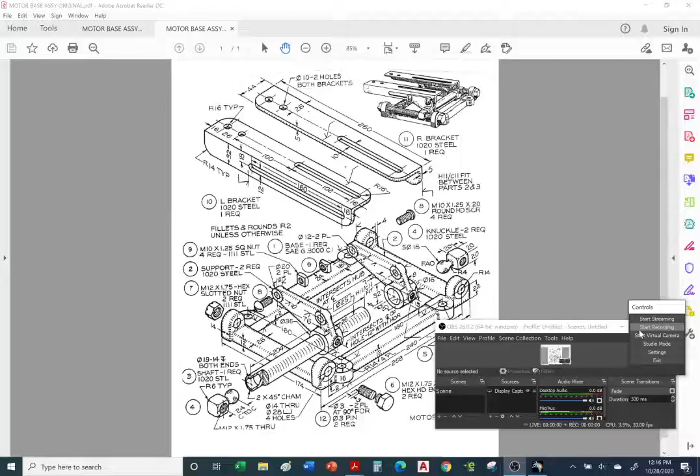Motor base assembly. For this assignment, you're going to model all the components for the motor base assembly. As far as the hardware, the bolts and nuts, you can either download them or model them yourself, but I'm also going to email you the loose hardware, bolts and nuts.

I want you to notice that this is in millimeters. So units are in millimeters. You can tell by the threads. Anytime you see an M in front of a number, it's indicating metric units. In this case, 10 millimeters for the major diameter on the threads. Here's another example: a bolt that has a major diameter for the threads of 12 millimeters.

Let's take a look at the base plate first. You're going to model the base plate first. This is probably the most complicated part you're going to model in this class, and this can be very confusing, so I decided to create a second handout. This is the original handout we've been using for years, so I decided to create a more simplified version and break it up into different pages.

We're going to model the entire assembly. This is the top assembly, and it's made up of smaller assemblies: this smaller assembly, this one, and this one. Let's go to the next page so you can see the smaller assemblies inside of the top assembly.

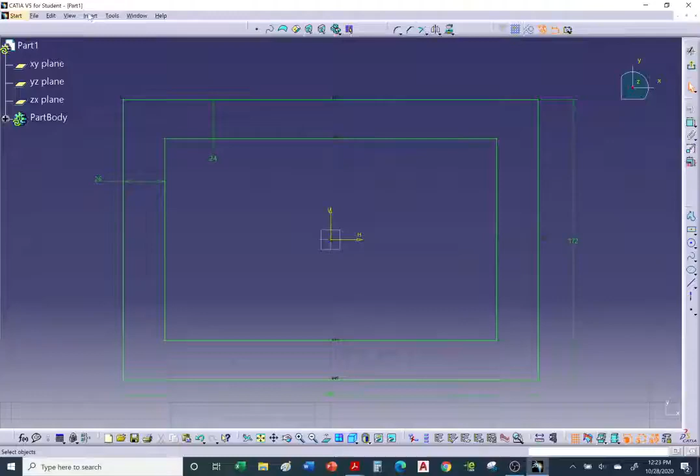And it's symmetrical. All right, so let's go ahead and exit, but before we do, let's do a tool sketch analysis. Everything looks good. Okay, let's exit.

Okay, so now we're going to do a pad. Going back to the drawing, the pad will be 12 millimeters. Now we're going to cut it in half, going 6 millimeters in each direction for a total of 12. So we're going to do a pad of 6 millimeters. Preview, there it is. But we're also going to mirror it so it goes 6 millimeters in the opposite direction of the sketch. There it is, preview, and that's a total of 12, okay.

All right, so now let's do a sketch for the tabs. Okay, so we have our tabs. We'll just have to draw one and then we'll do mirror to create the other three. Note the distance from the edge to the center of the arc or circle is 18 millimeters and the radius is 14. Okay, so we'll come back if we need to check the dimensions again.

All right, so we're going to do a sketch again, and I'm not going to do it on the surface. I'm going to do it on that same XY plane as the first sketch. I'm going to go ahead and, instead of using profile or arcs and lines and circles, use elongated hole to create that profile. So I'm going to go to elongated hole, one of my favorite commands.

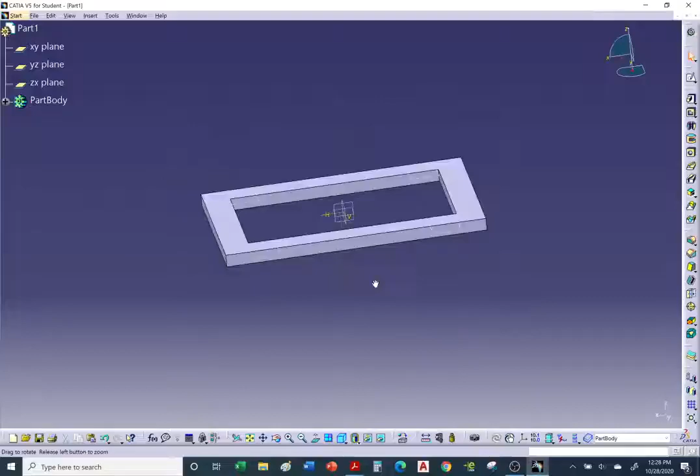Now, one thing about the tabs here, I want you to notice it's centered with respect to the neutral axis of the first pad. That's because we did our first two sketches on the same plane.

Now, if we go to the drawing, you can see that the tabs are thicker than the frame. The frame is 12 millimeters, the pad is 16 millimeters. If we go back to the original drawing, you can see that the tabs are 16 millimeters in thickness and the rectangular frame is 12 millimeters.

Okay, so we'll go with 16 for the second pad. We're going to select our second sketch, do a pad, and this time we'll go up to 8. Don't forget to mirror it, so it'll go also 8 in the opposite direction for a total of 16. And there we have it, as you can see.

Okay, now let's do the next set of pads. So now we're going to do this pad. Later we will address the issue of the 174 versus 172.

Okay, so let's focus on the sketch for this tab. We'll sketch one of them, and then we'll do mirror. So all we have to do is sketch one tab. Let's go ahead and sketch this one.

Notice from the edge here to the center is 22, radius of 14. I also want you to notice that this edge here doesn't line up with the edge of the rectangular frame. There is a 4 millimeter offset, so from the edge to the edge of the tabs is 4 millimeters.

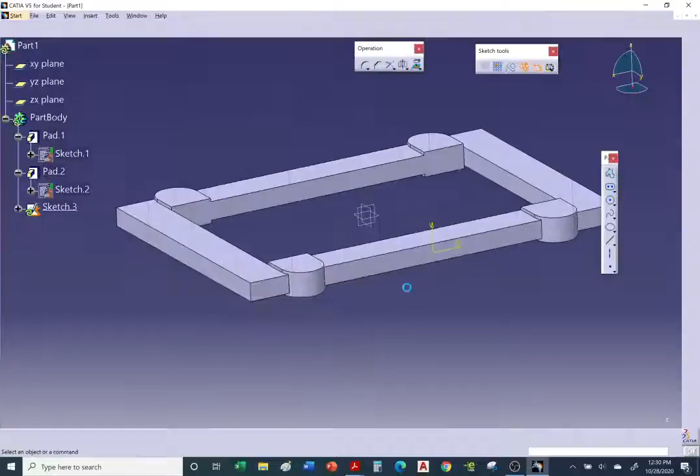Okay, so let's go ahead and just draw on the solid planar surface. Let's zoom into this area. Once again, I'm going to use elongated hole like we did on the previous sketch. Just guesstimate the size for now. We're going to use a radius of 14.

Enter. And like on the previous sketch, we're going to draw a line from tangent to tangent point. We're going to now select the arc and turn it into a construction element. There it is, as you can see. Then click in space to deselect and turn standard back on, or else any new elements you create will come out as construction lines or dashed lines.

All right, so let's go ahead and hit normal, make sure everything is parallel. Now I'm going to pick this edge, hold on to the control key, this line, and add a coincidence constraint.

And once again, the distance from the bottom of the surface to the center of the arc is 22. And we have a 4 millimeter offset from this edge of the rectangular base to the edge of the tab is 4 millimeters.

Okay, now we're almost there. Now here we have an issue. Notice there's a gap here. We need to fix this. There shouldn't be a gap here. If we go back to our original drawing, it's hard to see here, but if we look at it on the opposite side, there's no gap here. It's a nice transition from this tab to this one.

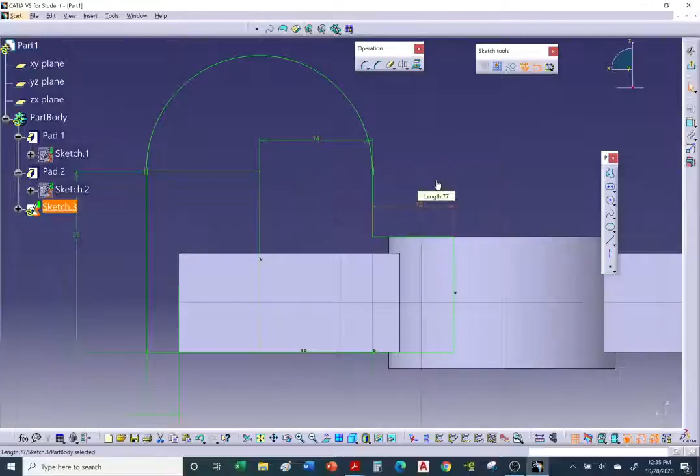So I'm going to put a dimension here, and we'll just round it off to a nice number. I'll just round it off to 12. It should work. There it is. And there's our profile.

Let's do a tool sketch analysis. Notice it's closed. Okay, everything looks good. All right, so let's go ahead and exit.

Again, once again, we extended this so it can blend into this pad, so we can have a nice transition with no gap. Okay, exit. Oh, one thing I did forget to do is I forgot to mirror it over.

Let's go back to the sketch, double click on the sketch. I forgot to mirror it over to the right side. Let's select everything, do a mirror about the vertical. There it is, tool sketch analysis. Good, everything's closed. Yep.

Exit, and we'll do our pad. Okay, we'll do our pad and then we'll mirror the pad over to the other side. Okay, so let's take a look at the drawing, see how much the pad is on this one. Here it is, 14. Okay, so 14 millimeter pad for this tab.

So let's do a pad of this sketch of 14 millimeters. 14 and preview. Notice it's going in the wrong direction, so I got to hit reverse button. Preview, there it is.

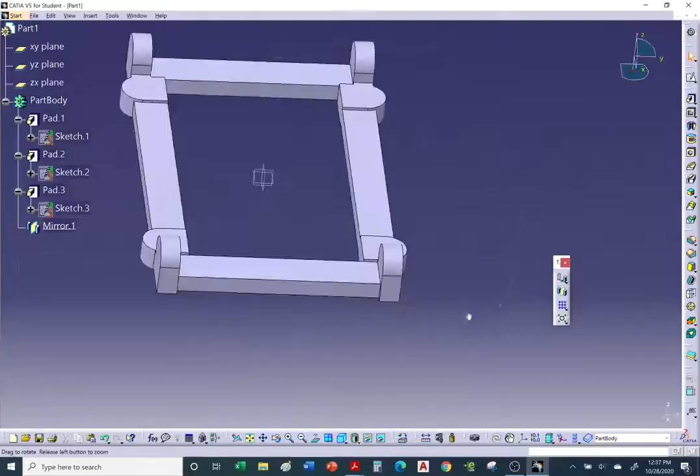All right, so everything looks good. Now let's address the 174 dimension. So going back, remember we talked about the 174 versus the 172. So it's 172 from here to here, but 174 from this edge to this one.

Okay, so let's check those dimensions. Now, if you want to leave it alone, I'm not going to take any points off. If you want to leave it the way it is, it's okay, I'm not going to take points off. I know this is a very complex part, so I'm being lenient on this one when it comes to grading. But if you want to fix it, let's take some measurements just to double check.

Use your measuring tools. So this is 172 as it should be, but from here to here should be 174, and it's not. So if you wanted to do it correctly and fix this, what we're going to do is take this pad and extend it 1 millimeter outward. And because of the mirror command, it'll also extend it on this side, and it'll make up for the loss of the 2 millimeters. So it'll increase it by 1 and 1 for a total of 174.

Okay, so let's go back to this pad, the last pad we created, and we're going to extend it 1 millimeter outward. Okay, so we're going to click on the More tab. There's a second limit, so now it's going to go in the opposite direction, and I'm going to increase it to 1 from 0 to 1. As you can see, it's giving us a preview. It's thickening outward.

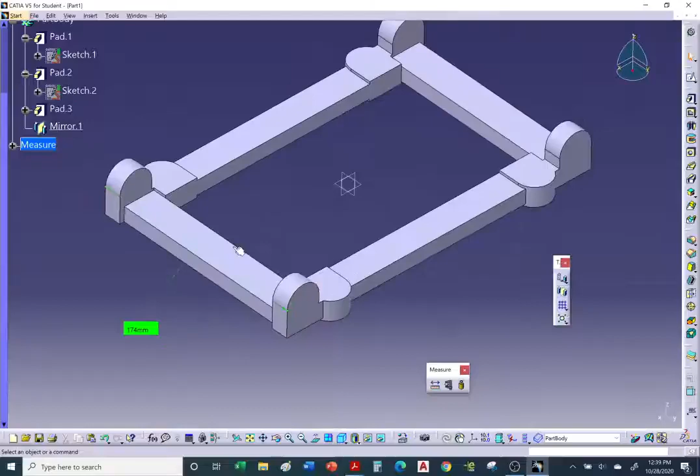Okay, let me remove this. I don't need it, delete it. All right, so we still have the holes and we have fillets, and we'll be done with this.

Let's look at the original. Notice how there's fillets. So this is either an aluminum or a steel. Oh, it looks like it's steel. So this appears to be a steel base plate.

So the base plate was casted in a mold. It was liquid metal poured into a mold, and once it's dried and cooled down, it'll be taken out of the mold and then it'll be machined. Now these surfaces are rough surfaces, just like on this one also. These are rough surfaces, and the rough surface is due to the mold. The mold, after being used, will not give us a nice clean finish after multiple uses.

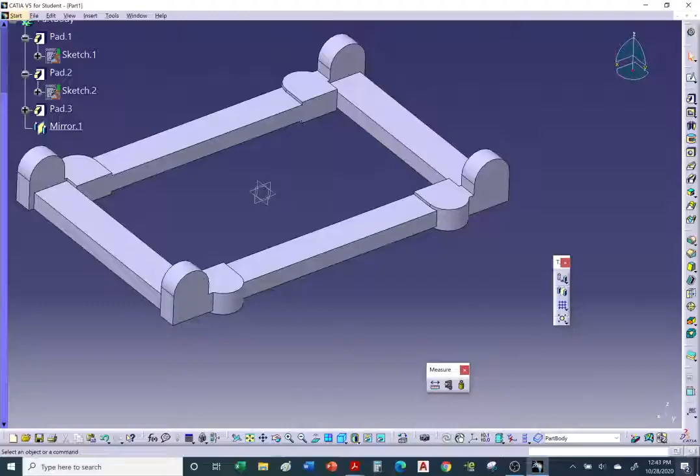Okay, so all rounds are 2, so this will be optional. Let's go ahead and do some fillets, and once again, if you want to leave them out, you may. I'm going to do the fillets for practice, or for those that want to see how to create them.

I'm going to create fillets, and I'm going to use the fillet command a few times, so I don't have to do fillets all in one shot. If you try and do too many fillets in one shot, there might be error messages, and it's going to be hard to find where the error is at. So I'm going to do a few fillets at a time, starting with the fillets around this tab first.

So I'm going to use the fillet command and a radius of 2. Notice that the default is tangency, let me explain what that means. If I was to pick this edge, it'll turn red, and notice this here turns like a red dashed line, letting me know that even though you chose this edge, it continues with tangency and ends here, it'll terminate here. So even though I only selected this edge, it recognizes tangency and keeps going till there is no more tangency.

When it reaches the sharp corner, the tangency ends. Or I should say tangency continuity, something you'll learn in CAD 37, surfacing in CATIA.

Okay, so now I'm going to keep going around, select this edge, select this edge. Notice it keeps going. See the dashes? It recognizes that even though I selected this edge, it continues on because it recognizes tangency, and then it stops once tangency ends.

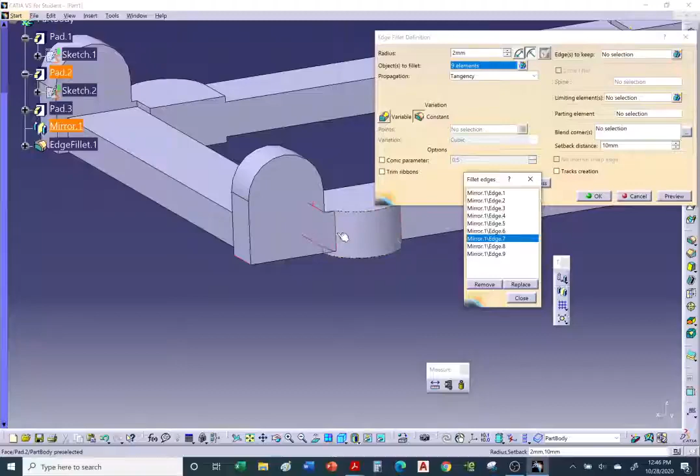If I was to hit this little bag here, think of this as a little bag of edges that I've chosen. So it's telling me these are all the edges I've chosen. You can remove them, you can replace them. You can just deselect if you want. If you want to remove a fillet, you can always click to deselect, or you can remove it from here. I'm going to close this sub window here.

All right, so you're going to see this increase in numbers as I pick more edges. Okay, so let's go to the other side, and I'm going to pick the same edges as the first one.

If you select an edge by mistake, let's say I chose a surface by mistake, lights all this up, you can always click on it to deselect to remove it. Okay. You have this one.

This one, and it kept going, good. And let's do this one, and the inside, okay. Let's hit OK to see what we get. No error messages, good. I'll just reselect again.

And again, the reason I'm doing a few at a time is because sometimes you'll get an error. And when you select so many, pre-selected so many edges, that it's difficult to go back and find the error. Okay, so let's select these edges here, all right.

Again, this is optional. Okay, let's go around the tab here. And it continues on, okay. I'm just going to go a little bit faster. Okay, and hit OK, make sure everything looks good, yes.

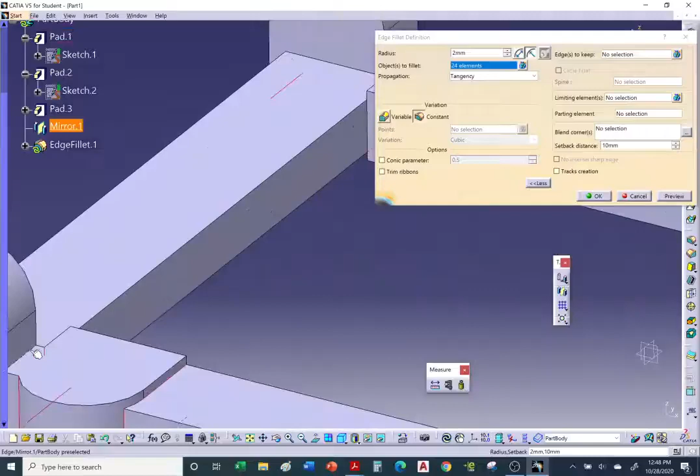Okay, let's go to the final corner here. May have forgotten, yep, I did forget the one on the other side. Select this edge. Okay.

And again, just to emphasize, typically you wait to the very end to do fillets. We still have to do holes. Oh, notice how I mistakenly clicked this surface. Let me click it to deselect. There it is, and OK.

All right, so that's one fillet operation. All right, so now I'm going to do a second edge fillet operation, and I'll do the rectangular area. Okay, so now I'm going to fillet the rectangular area.

Okay, I think I got all the rectangular area. And hit OK. There it is. Oh, I did miss the inside area.

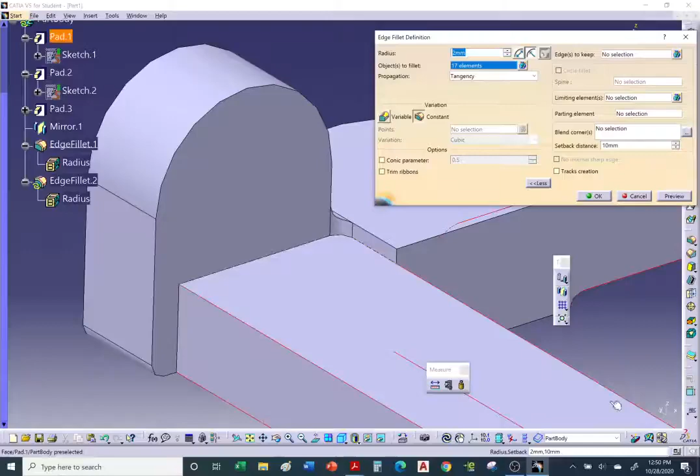So what I'm going to do is go to edge fillet number 2. Let's see what happens when we pick this edge. Hit OK. All right. So it was edge fillet number 2 that I forgot.

I also forgot to pick this inside edge. Hit OK. Okay, that's better. And I need to click this one. So let's go back to edge fillet number 2. Okay, that looks cleaner. All right, looks a lot better.

Now, one thing you can always do is go back in time. If I want to see what it looks like without the fillet, I can right click, define. It'll place these as dormant, I guess you could say. It'll ignore these and only show you the history up to this point. So right click define is like going back to the past. If you want to come back to the present, just right click on the part body and define, and it'll bring you back to the present.

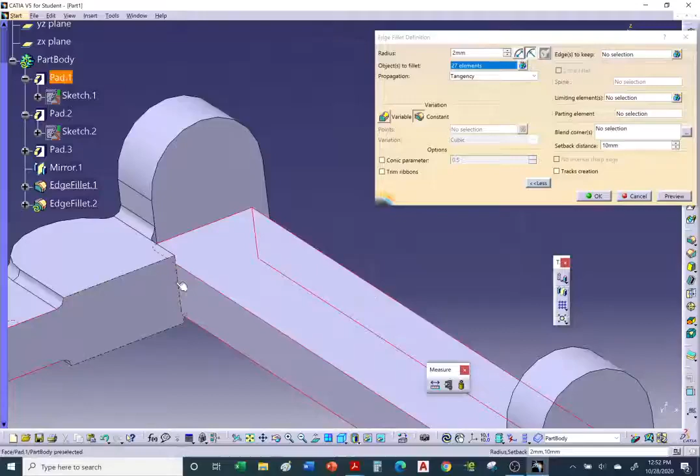Okay, I'm gonna have to do this also for the others. So let's go here, edge fillet instance number 2. I gotta go back and do these here, which I missed. So now I gotta go to all 4 corners. Okay, there it is, I think I got them all. Let me double check, make sure I didn't miss anything.

Now there may be a concern as to whether this can be manufactured, as far as the mold to make this part where you pour the liquid metal in. That's a whole different topic, not covered in this class.

All right, so now let's go ahead and put fillets around the vertical tabs. Let's create a new fillet instance, edge fillet instance number 3. Let's do one tab and see what we get. I'm going to select the top of this one and top of this one. Hit OK and see what we get.

Now it's just giving me a warning like, hey, double check that this is what you want. This is a very common warning when you create fillets. It's basically telling us, hey, check if this is what you want.

One thing I did not want is to fillet along this edge. If you go back to the original handout, notice there's no fillet on this edge. The reason is because this is machined. So maybe it did have a fillet at first and had excess material beyond 16 millimeters in thickness, and then the machine shop came in and smoothed this out, most likely because a bolt goes here to bolt this onto some type of work table. So again, we don't want this edge with the fillet.

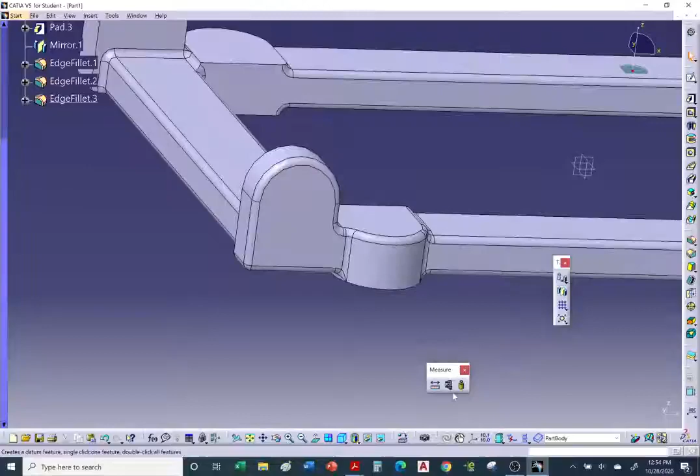Okay, so we need to fix that. I'm going to double click here. Notice we mentioned tangency before, let's see what happens when I go to minimal. I don't want it to continue its path along a tangency. Because tangency was the default, it kept filleting and kept going around, because it recognized there was curvature or tangent continuity. So I'm going to take this off, go to minimal. Notice it already removed it. I'm going to hit OK, see what we get, and it stopped. Okay, good, so it stopped.

Now we may not need to fillet this area. If we look at the PDF file, it kind of fillets this area. We'll just leave it the way it is. Maybe there's no fillet here, but we'll just leave it to save time.

Okay, so let's do it on the other 3 tabs. Let's double check here, make sure everything else is okay. Let's double click on edge fillet 3, or the last one that you created, and do the same thing for the other 3 tabs.

And if you were to show this to an NC programmer or a machinist, they'll probably say, hey, we don't like your fillets, you need to go ahead and fix it because it's difficult to machine those fillets. That just comes with experience, and also you can get advice from a more experienced tool designer or machinist. Okay, there it is.

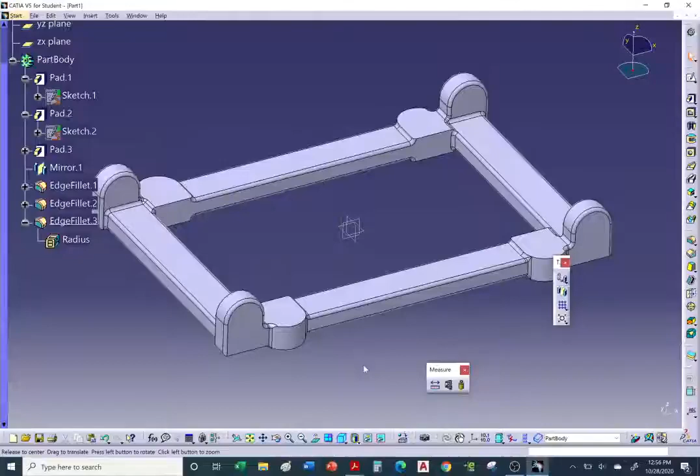One thing I'm going to do is pre-select the edge, the arc, so it'll center the hole. So click on the hole command, click on surface, and we have a 12 millimeter diameter, and we're going to go up to last. That'll go all the way through, and okay, there it is. Let me double click on these toolbars so they can be docked back where they belong.

Okay, now let's mirror, so we can mirror this hole over to this side. Or you can do one hole at a time, it's up to you. I'm going to use mirror, and we're going to mirror about the vertical. There it is, it's giving us a preview, and okay. So there we have the two holes.

All right, so let's mirror these two holes over to the other side, this one and this one.

Let's use mirror again. Now it's giving us an error message, telling us you cannot mirror a transformed element, in other words you cannot mirror a mirrored element. So I'm just going to cancel that. Since this hole was mirrored, you cannot mirror a mirrored or translated element.

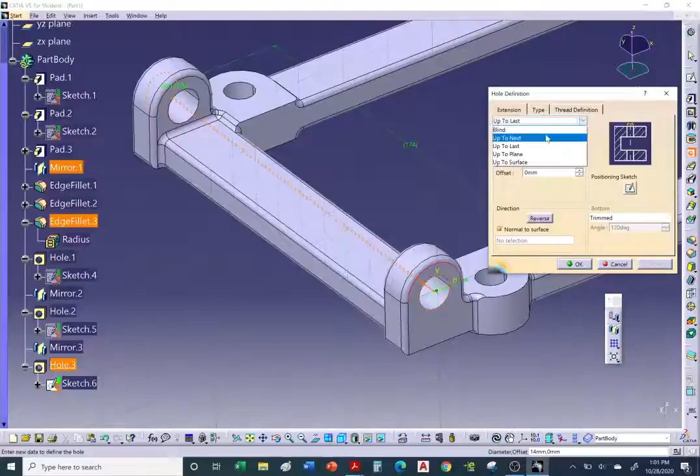So I'm just going to have it go through the first tab and hit preview. There it is—so it makes the other one disappear.

All right, now we're going to go to counterbore. Go to style, and select counterbore, to create a larger diameter hole over the little one. There it is. The diameter, if we go back to our drawing, is 28—this is the counterbore symbol. In this case we're just doing a spot face, barely kissing off the surface to remove the rough area to accommodate the head of this bolt.

Diameter of 28, and preview. Notice it's cutting through, but we don't want to go that deep—we're just going to kiss it. So we put a depth of 1 millimeter, and okay. Notice it just removed part of the rough area. If you want to go 0.5 millimeter, go for it. We're just kissing off the rough surface due to the casting.

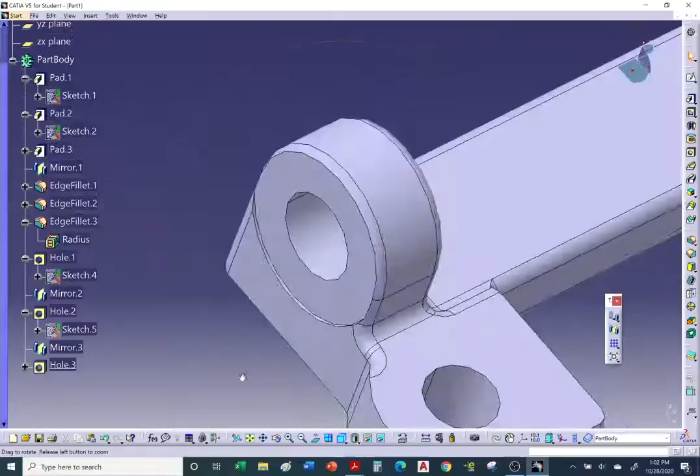Now I'm going to go down to 0.5 millimeter. I'll go back to the hole command, go to the type tab, depth, and set it to 0.5. Preview—yeah, that looks a lot better. Okay. A lot cleaner. This is referred to as a spot face or a counterbore hole.

Okay, so I'm going to repeat the same thing.

Okay, so I'm going to do the exact same thing on this side, and it should use the default measurements I used earlier, the default diameter and depth. So I'm going to pre-select the arc, click the hole command, click on surface, and there it is. It remembers the last inputs, and there it is.

Okay, now what I can do is mirror these two. I'm going to pre-select the two holes, and mirror them over to the opposite side. Let's use mirror, and we're going to mirror about the vertical, the ZX plane. It's already given us a preview, and okay. There we go, we have our spot face and holes.

All right, and once again, don't worry about the fillets. If your fillets look different than what I modeled up, it's okay. We can spend a whole semester just talking about fillets. And again, fillets, it takes experience to know how to fillet edges, especially when there's curvature involved. And it also, you need to have some machine shop experience or NC programming experience. An NC programmer for a machine shop will tell you if it can be done or not, or they'll advise you on how to fix that.

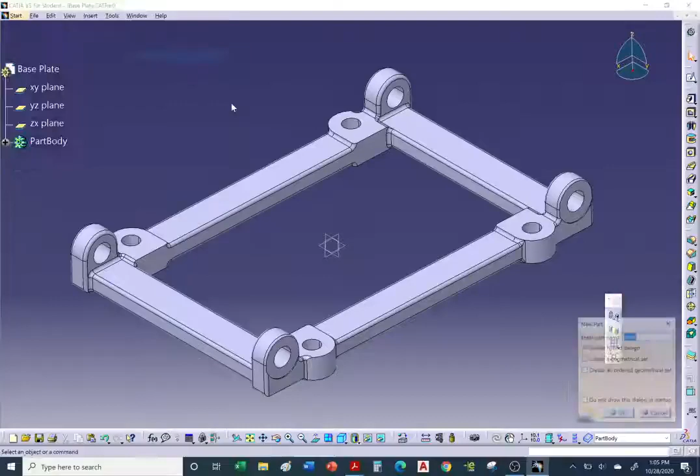Okay, if you want, go ahead and save your base plate. I'm going to create a new file, or you can just go to Start, Mechanical Design, Part Design. Even though we are already in the Part Design workbench, if we click on it again, CATIA assumes you're going to start a new part. So if I go to Part Design Workbench, even though we're already in it, as you can see, CATIA knows to create a new part.

Now I did not lose my base plate. I can always go back to it, just go to the drop down window, to window drop down, and you can go back to base plate. So I currently have 2 sessions open. If I go vertical, you can see both sessions. Notice this is blue, letting me know this window's active. If I click on this one, it'll turn blue, and now this one's active. You can either maximize here or double click on the frame to maximize that window.

Okay, so we're going to draw an L shape. Let's sketch, I'll sketch on a vertical, I'll pick the ZX plane. It doesn't matter which one. Create a sketch, and I'm going to draw an L shape. Now you can continue on and close the profile, but I'm just going to do 2 lines, and I'm going to escape and exit.

Okay, and I'm going to add my measurements. So let's go back, measurements are 44 and 32. 44 for the horizontal, 32 for the vertical.

Okay, so the rule to follow is to do a closed profile, right? We want to close it. But we're going to cheat. We can get away with not using a closed profile and still use pad. So let's exit the sketch, that's all we needed, tool sketch analysis. It's going to warn us, hey, this is open, it's not closed. I want you to notice that in cyan, it shows us where the mistake is at. It's telling us, hey, there's a gap or there's an overlap. Okay, I'm going to ignore it. I'm going to exit the sketch.

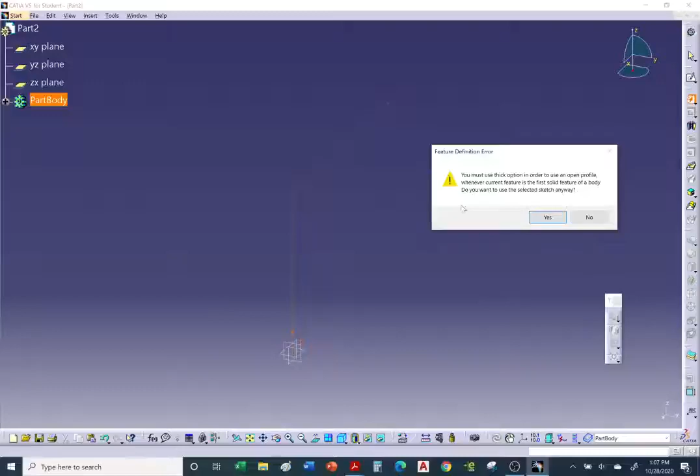Now I'm going to do a pad. And when I do a pad, it's going to give me an error message, say, hey, this is not a closed profile. But you know what, if you pick the thick option to thicken it, then we'll accept it. And say yes, we are going to thicken it.

All right, so let's first get the length of this bracket. So the overall length is 260 and it has a thickness of 5. So 260 for the length. For the length, we're going to go 260. And preview, and it's still warning us, hey, this is not a closed profile, you need to use thicken. Okay, so I'll hit OK.

So here's the thick option, so click on the thick option. And for thickness, we're going to go 5. So you can thicken in two directions, inward or outward. Let's thicken this to 5, it's going inward, that's what we wanted. You can always thicken in two directions, we're going to go inward as far as the thickening. We can also go outward, as you can see, but we're not going outward. I'm going to go back to 0. Preview, and there it is. And OK.

Okay, we got the difficult part done.

All right, so let's go ahead and add some sketches. Let's sketch this one on the top surface.

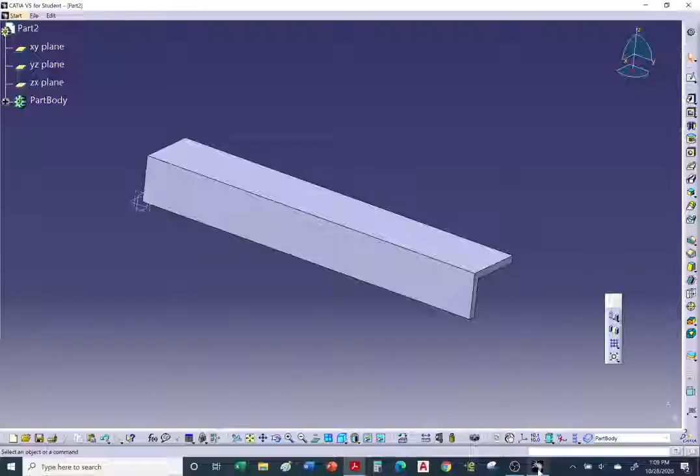Typically when you do these 4 corners with fillets, you want to keep it the same, but in this case they're not. So one pair is 16. Fillet this corner, and this corner was 16. Type in 16 for your radius - there it is. And for the bottom, we're going to go with 4... my mistake, 14. Okay, 14, not 16. And there it is.

Okay, so now let's go ahead and do our sketch up here. Now typically we want to do it on a plane, but we don't have a choice here, so we'll use the surface.

So we do have a slot and we have 2 holes. Now they do line up with the fillets here. So let's start with the elongated hole - one of my favorite commands, right? So we'll do an elongated hole and then we'll put a constraint with the arc.

I'll worry about the dimensions later.

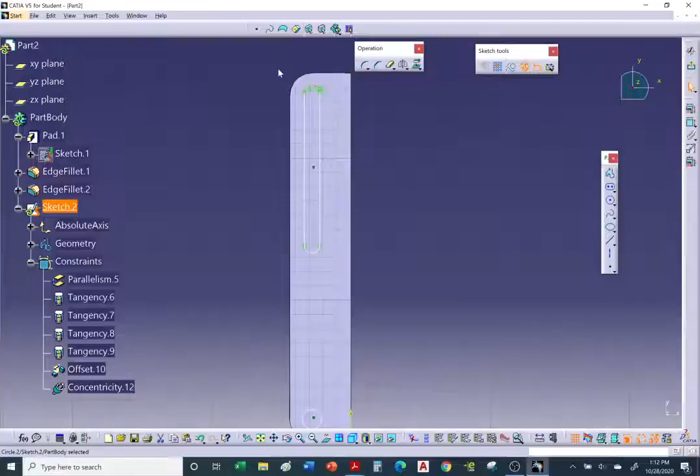Okay, so I'm going to add a relationship between this circle and the arc. Hold on to the control key, click on the arc, and we're going to make it concentric. There it is - now the hole is centered with the arc. We're going to do the same thing with the slot: pick this arc, hold on to the control key, click the arc, concentricity, and OK.

All right, and we have another hole. Now we do want to line it up with this one, so I want to track it. I want you to notice that this hole, if I grab it by the center, it's constrained to this one - at least it appears to be, or else it's constrained to this line. Oh, I didn't constrain it. It tracked this point, but it actually constrained it to this center line, which is fine, because I think these two holes are centered about this line of the elongated hole.

All right, so let's go get some measurements. Let me go ahead and turn this just so I can match the drawing. All right, so, elongated hole - it has a radius.

So what is the radius? Well, it's just half of 10, which is 5. Okay, so they're giving us this distance instead of the radius. They do have a relationship because these horizontal lines are tangent to the ends of the arcs, and the arcs are 180. And the radii, or diameter I should say, of the holes are 10 - so it just happens that the arcs are the same size as the holes.

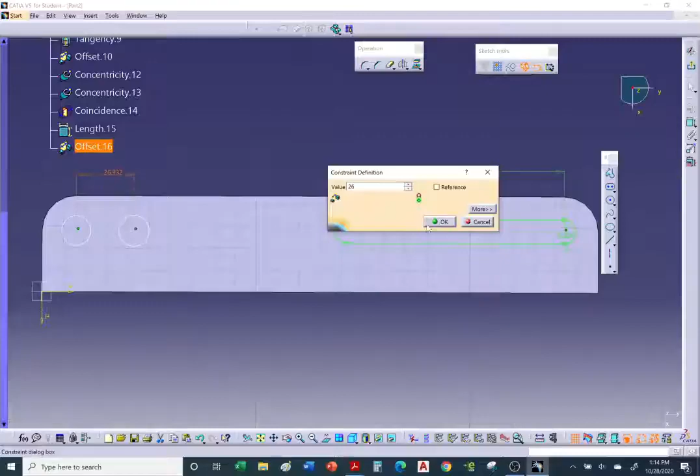And we have diameters of 10. Okay, so diameter of 10, and diameter of 10 for the other one also. And OK. All right, so let's take a look at the radius here, which is 5, half of 10. So let's change this to 5.

And there it is. Let's do a tool sketch analysis - everything is closed, good. And we'll do our pocket. Okay, let me just double check the dimensions - yep, 102, 26, and 10.

All right, so let's exit and do a pocket, up to last, and OK. And there it is. Okay, so now we need to do our sketch for this wall here - okay, so we have a slot.

Okay, so this slot isn't lined up with the arc. It should have been - it's probably a mistake on my end, but it's okay. We'll just follow the dimensions here. If your dimensions are off, I'm not going to take any points off.

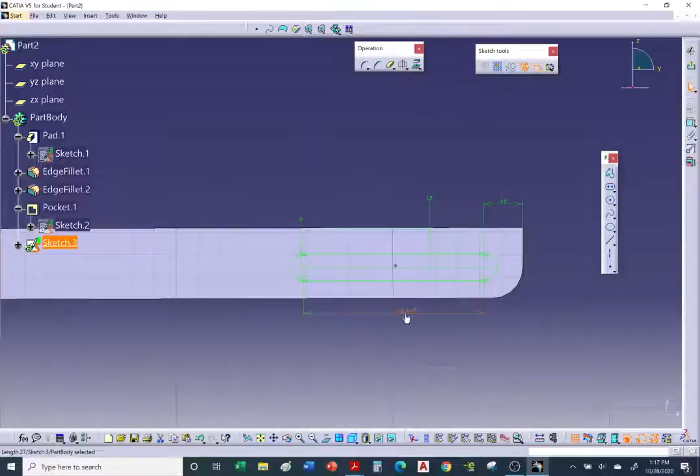Okay, it looks good. Let's do a tool sketch analysis - everything's closed, everything's good. And let's exit and do a pocket. Up to last, and okay. And there it is, we're done with our bracket.

Okay, I don't think we missed anything, got all the features. Oh, I'm missing the radius of 2. So we have a fillet here of 2.

And actually along the inside edges - so all the inside edges have a fillet of 2. Okay, so let's do a fillet here first of 2. Okay, so 2 radii or radius, and okay.

All right, so let's double click and let's add more. Let's see if it'll let me add this edge. Let me hit OK, see if it'll accept it.

Okay, notice how it does a turn here. So I'm going to do it in steps. I'm going to remove the second edge that I chose.

I'm going to remove this one by selecting it and only keep the original one, the one edge that we selected. I want you to notice that we're going to get a different result when I do a second edge fillet. So I'm going to do a second edge fillet.

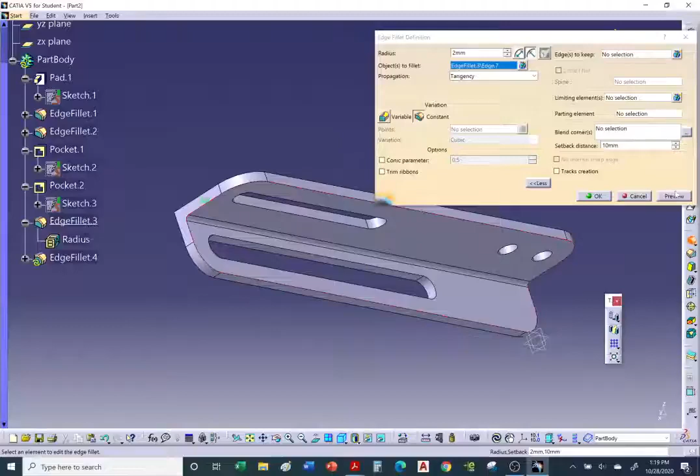And by clicking this edge, it's going to go all the way around. Notice it follows tangency because that's the default. Preview and hit OK. Notice how we get a different result by doing 2 separate edge fillet operations versus 1 - it'll give you a different result.

So if we go back, I can click define, go back here. And just to show you again what would happen if I select the second edge under the same edge fillet operation. Notice it'll give you a different looking fillet.

Okay, now the second fillet can't exist because it's going to clash with this one, so I'm just going to hit undo so we can go back to where we were. There it is. And to come back to the present, right click on the part body and define. There it is. Okay, so we're done with this part.

Let's go ahead and give it a name. Right click, properties. Okay, and we'll call it bracket.

And okay, you know what, let's give it some color. You don't have to do this part, but it's good practice. Right click, properties, go to graphic tab. I'm going to give it some color.

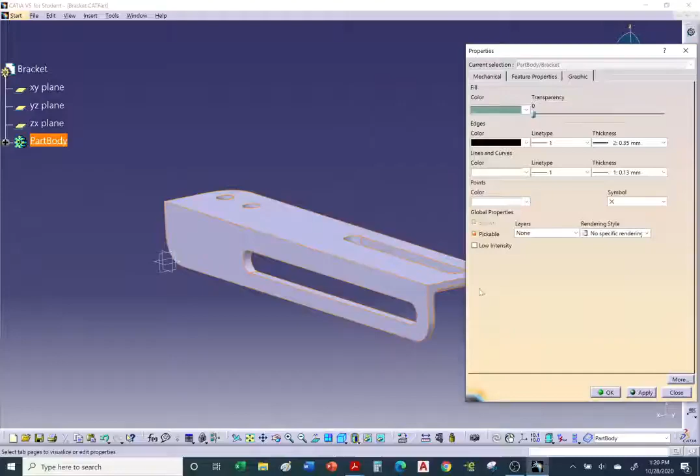Let's go to more colors. And I'm going to pick - it's good to pick soft colors. Soft colors for the large pieces and bright colors for the small pieces, like the hardware. Okay, so give it some color.

I'm going to go back to my base plate and give it color. Right click, properties, pick whatever color you want. If you want to make it yellow, keep in mind it's going to be bright, it's going to be an eyesore. I'm going to give it a purplish color - nice soft color. Okay.

All right, so now let's move on to the next part, which is the support. All right, so there's different ways of doing this. I'm going to use profile.

We can also draw circles and then connect the circles with lines for our sketch. Okay, so we're going to start by first drawing this wall or this flange, and then we'll come back and do the bosses. Let's do this sketch, and it has a pad or thickness of 8.

All right, so I'm going to do a rough sketch first, and I'm going to have the origin here at 0, 0. All right, so let's start with this simple sketch.

Okay, so let's start again, mechanical design, part design, and even though we are in part design, when we click it again, CATIA knows that you want a new part.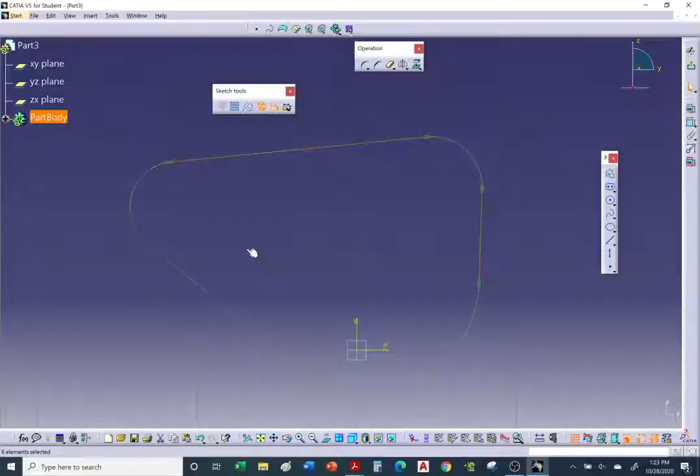Okay, you can see this is a very rough sketch. All right, so first, look, I'm missing a tangency, as you can see. I was to grab to this corner. You can clearly see it there. All right, so I'm going to start by making this arc centered about the origin. So here's that point, see there's that point for this arc. That's the center. But let's see if I can put concentricity between the origin and the arc.

So I'm going to hold on to the control key on the keyboard, select the origin, the arc, and go to constraints. Oh, it does allow me to add concentricity. I wasn't sure if it would. There it is. Okay, so I pre-selected the origin and the arc and went to concentricity constraint.

Okay, this should be vertical, so I'll make this one vertical. And this one should be horizontal, let's add a horizontal constraint. And we need to add a tangency constraint between this line and the arc. Hold on to the control key when you select the two elements, and let's add tangency. And check that we have tangency all the way around, and yes we do.

Okay, so now let's throw in some dimensions. All right, so this has a diameter of 36, so the radius is 18, half of 36 is 18. And these circles here have diameters of 20, cut that in half, and that's a radius of 10. Okay, so 18 and 10.

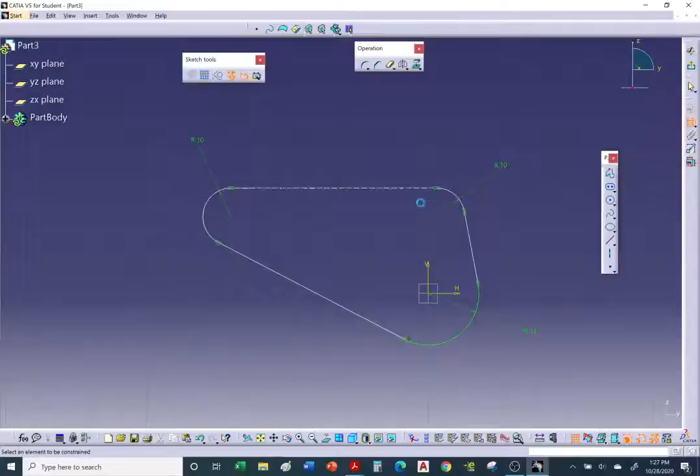Okay, so now let's put a dimension from center to center. It was 72, I believe. And then we have a dimension from the horizontal, which happens to cross the center point of the arc, to this center. And I forgot the dimension, 32. Oh, so it's 76 and 32.

And 76. All right. Now we have this dimension of 4. So from this vertical here to this point is 4. Okay, so let's go ahead and add that one.

Okay, so you have two options. You can either go to the vertical, which happens to cross the center of the arc to this point, and change it to 4. Another option is, let me delete it. Let's go center to center, but notice it's not giving me a horizontal dimension. You can force it horizontally, just right click and say, hey, I want a horizontal dimension. There it is.

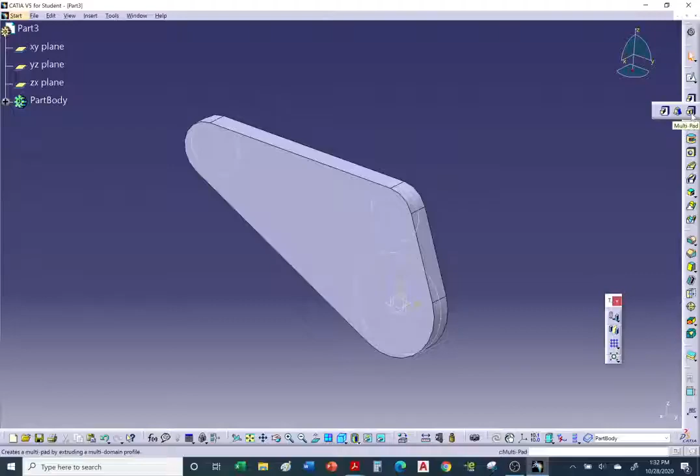Okay, so instead of doing a pad, we're going to do a multi-pad. Okay, so let's go to multi-pad here. So click on multi-pad and let's select the sketch. All right, so we're going to do a pad of 12 and preview.

My mistake, I got to do it here. Click here. We're going to give it a thickness of 12. Oh, I picked the wrong one. That one has a thickness of 26, or I should say 13, because we're going to mirror it. Let's see if we have a mirror option here. There it is. So we can also go 13 in the opposite direction. Did not have a mirror, so I'll just manually type in 13.

Preview. There it is. Total of 26. Now let's go to the next one. So the next one, we're going to go 6 in each direction. And preview. There it is. Total of 12. And finally, the last one. Same thing. We're going to go 6 in one direction and 6 in the opposite for a total of 12. Preview. And there we have it. There's our bosses. And OK.

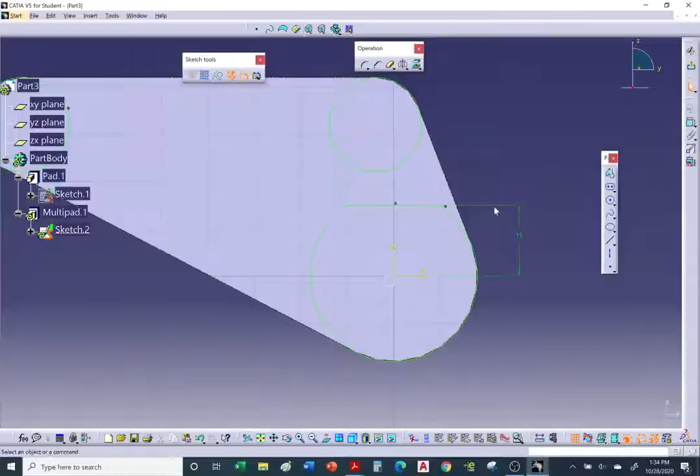Okay, so we're just going to simply use the eraser, quick trim, to remove the top portion. And there it is. So we have our flat top. Do a tool sketch analysis again.

Everything is closed. Okay, close it, exit, and your pad should update. There it is, it turned red, letting us know it was updating, and it did. All right, tough part is done.

Okay, now fillets. Fillets are a nightmare. So I'll leave that up to you if you want to fillet this object. We have fillets of 2, so typical radius of 2. Okay, so all the rounds are 2.

But before we do, I forgot to add this little boss. Luckily, we have this hole centered about the origin, so that'll help us create the surface here, or this pad. We're going to do a pad with the vertical plane here, and sketch it looking this way, horizontally on the vertical plane. We're going to draw a diameter of 16. Okay, so let's go back.

So on this vertical plane, in this case the ZX plane, I'm going to draw a sketch. I'm going to make a circle of 16, and again we're using that same origin. Diameter of 16. Notice the sketch is in this vertical plane. Now the pad is out here, but that's okay, we'll come back and fix that. And exit.

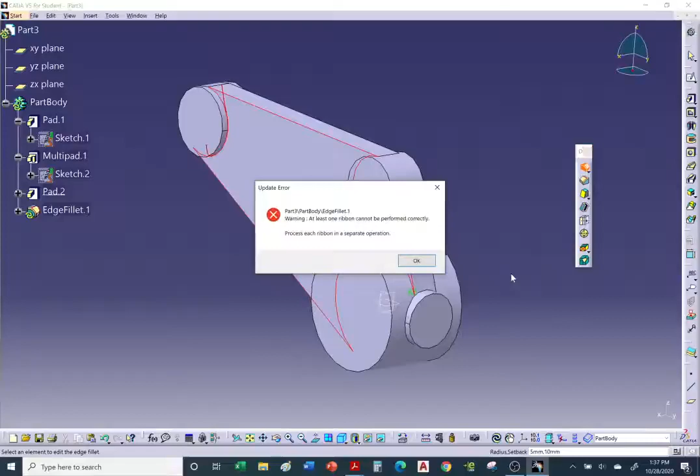Hey, do you want us to compute it? Yes, sure. Nope. Okay, so do you want to keep explicit edges? Let me say yes. I think what's causing the problem are these two edges. Let's see what happens when I say, hey, keep these two edges. Let's see what happens. Notice it's a light purple or magenta color.

So where it says keep edges, it's not going to try and fillet this portion. Let's see if it'll allow it to. Preview, and it looks like it did accept it. Close. Oh, and obviously the fillets are way too large. That could have been another reason for the error message.

So the default was 5, I changed it to 2, and it did accept it. Okay, so edges to keep. So that worked.

Now let's do the same thing on the other side. I'll do it as a separate operation and fillet. Let's see if it accepts it. Hit OK, and this time it did work without having to pick the edges to keep.

So in the previous one, the fillets were initially too large, and I chose edges to keep. Let's see what happens if I go back and remove those edges from the first fillet. I'm going to deselect them, I'm going to remove them. Oh, my mistake, cancel, go back.

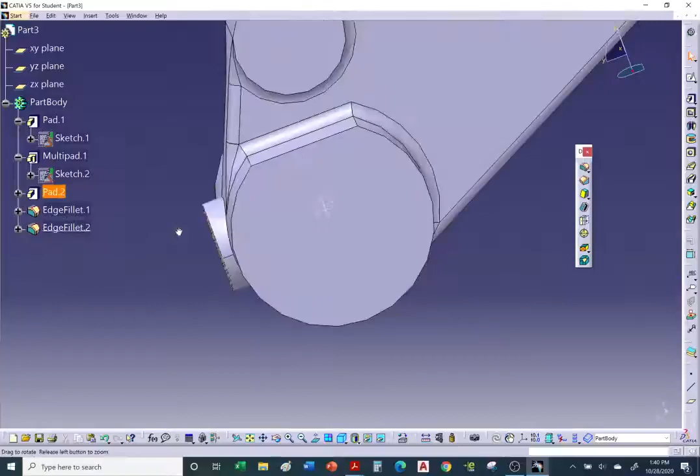So this is very common. Even though it's a mirror image, notice how the fillet on this side looks different from this side. It's the way it generated the fillets. Maybe it started on one edge for one and a different edge on the other one. Okay, we can go in circles trying to fix this. I'm just going to leave it alone, I'm just going to let it be.

All right, so now let's try and put a fillet around this one. See if it accepts it. Okay, did accept it. All right. I'm not going to try and go back and figure out why this didn't work. I can spend quite a few minutes or maybe an hour trying to figure it out. I'll just leave it alone. All right, so let's look for more fillets.

Okay, I think we got all the fillets. If I missed any, that's okay, let's just move on. Now let's draw or create the holes.

We have a 25 diameter, 12 diameter, and this one is a threaded hole. The M is for metric system, so we have an M10, meaning a 10 millimeter diameter threaded hole. This is a tapped hole with threads, but we never model threads because it eats up a lot of memory. So we'll just do it as a plain 10 millimeter diameter hole.

Okay, let's go place the holes into this part. Let's do the 10 millimeter one first. I'm going to pre-select the edge, and we're going to drill a hole through the surface of 10 millimeters.

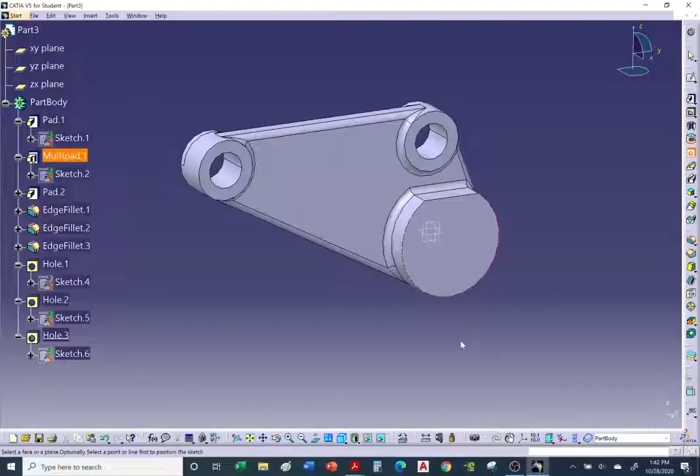And finally, the large hole, forgot the diameter, is 25. You can click the hole command and then click the edge, the arc. It'll center it - there it is - 25 diameter, up to last. Okay, there it is. Notice it took care of this hole, which is fine.

So this is a threaded hole where a set screw goes - it's just a screw with no head. The reason it doesn't have a head is so that we don't over tighten it. Okay, and these are just smooth, simple holes.

All right, so let's double check, make sure I didn't forget anything. Looks like we got it all.

All right, so let's name it support and give it a color. Right click properties, let's go ahead and give it a name: product, support, and okay. Oh, I forgot to give it color.

Right click properties, go to graphic. Oh, my mistake, I need to right click on the part body. Let me close - right click on the part body, properties, and that'll allow me to give it color. Go to the graphics tab. I'll make this tan or light brown. There it is. All right, so we're almost there.

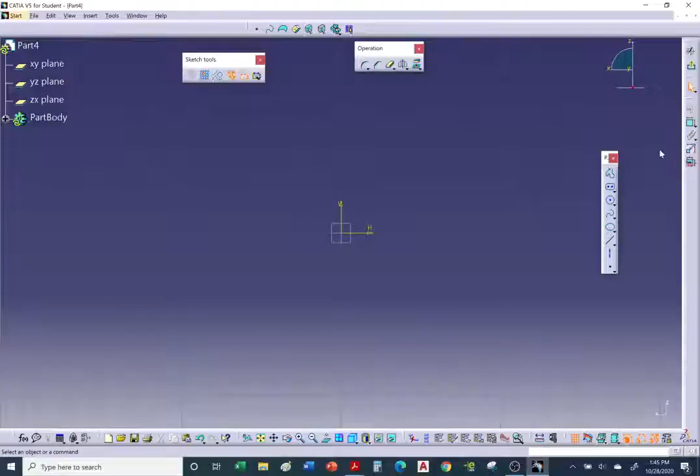All right, so let's go ahead and draw a sketch on any of the planes. I'll pick this vertical plane, the ZX plane, and let's do a sketch of a circle. I believe it was 25 in diameter.

And okay, we don't have to do a sketch analysis, let's go ahead and exit. Let's do a pad, and we're gonna do a mirror pad, okay? So we went with the diameter of 25. The length is 204 - cut that in half, so we go 102 in each direction, normal to the sketch.

Okay, so pad, sketch, 102, 102, preview. And let's use the mirrored option, and okay. All right, so now we need to add some holes.

Okay, so the holes: diameter of 19, depth 14. Diameter 19, depth 14.

Okay, so I'm going to pre-select the edge of the cylinder, go to hole command so that way it'll center it, click the surface. So we have a diameter of 19 and a depth of 14. And okay, there it is.

And repeat on the other side. You can hit the hole command and then select the edge - as long as it's an arc or circular, it'll center it, and it remembers the last input. And OK. And we have chamfers going around the edges.

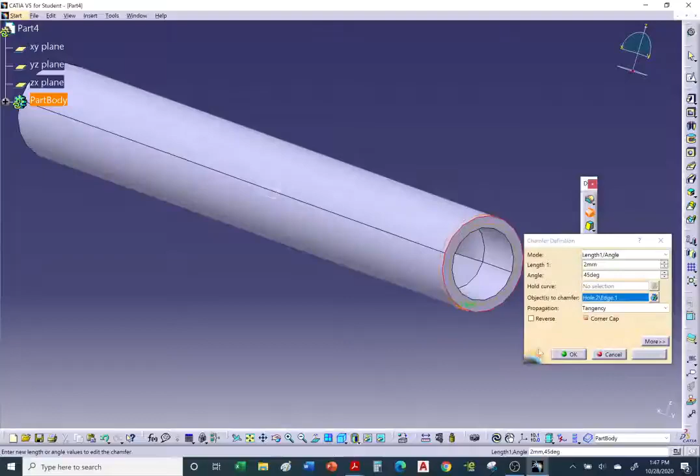2 millimeters by 45 degrees. I'm going to pre-select the edge and we're going to do a chamfer. So it's 2 millimeters, angle of 45, preview. And there's our chamfer.

We can always go back and create a second chamfer. We can just double click on the first one and select a second edge, so it'll do both edges under one chamfer command. So we don't have to do a second chamfer, we can do it all in one shot. And there it is.

Let's go ahead and give it a name. Right click properties, product, we'll call it shaft. And let's give it some color. Right click properties, go to graphic. Right click on part body, go to graphic, and again let's give it a smooth color. I'll use blue. And there it is.

All right, if you want, you can go ahead and save it. Let's go on to the next part, which is the knuckle.

So for the knuckle, to make it easy, we're going to sketch about the origin. We'll draw half the profile when we do the spherical portion. So first we'll start with the rectangular sketch, do a pad, and then we'll come back and do a profile of the spherical portion and do a revolve or a shaft command.

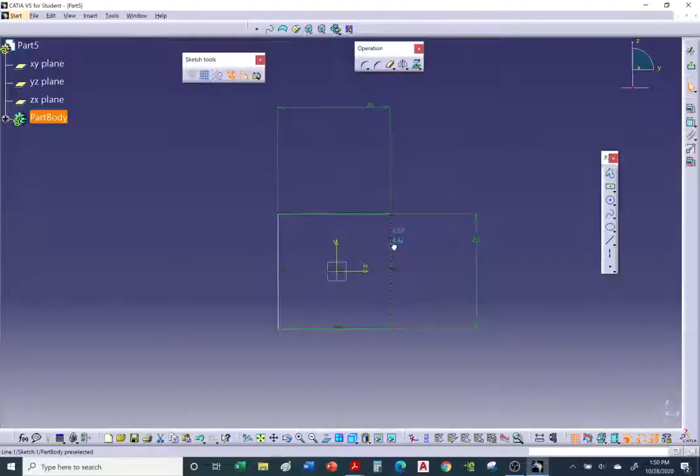Oh, and I missed something. Somehow this dimension... whoa, I didn't pick the origin. So I need to constrain it with the vertical. I misclicked, I didn't exactly pick the origin. So what I'm going to do is pick the center point here of the rectangle, hold on to the control key, and make it coincident to the vertical. It did end up being coincident to the horizontal, but not the vertical. I just slightly misclicked, so let me fix that. And there it is.

All right, so now let's go ahead and do a pad. Exit, do a sketch analysis first, pretty sure everything is fine. And let's do a pad of 10 in each direction, and do mirrored. And there's our cube, our 20 by 20 by 20 cube.

Next thing we're going to do is our spherical portion. I'm going to pick a vertical plane, the YZ plane, to do our sketch of the spherical portion. This is going to be a little bit tough.

I'll start with profile. I'm just going to do a rough sketch of the spherical part, starting with the vertical, which later I'm going to line up with this edge. Click, and then I'm going to do an arc. As you can see, I'm already creating the profile. Click, and then another arc tangent to that one. I'm trying to pick the horizontal, so I only need to draw half of the profile. I'm going to constrain it so it lands on the horizontal axis, and it'll constrain it. There it is, and hit escape. So there's a rough sketch of our profile, click and space to deselect.

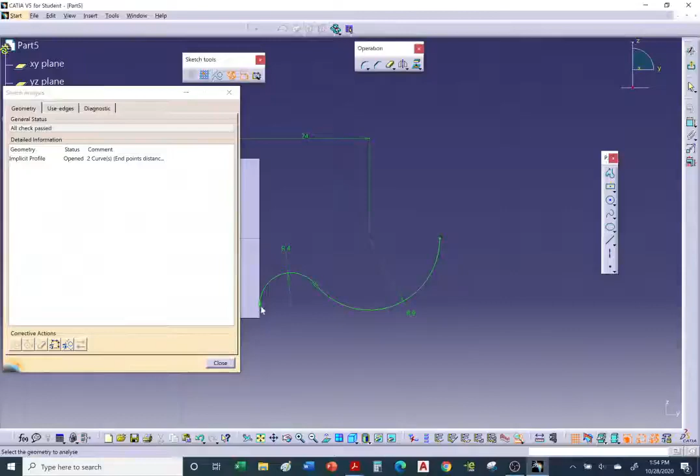We're going to do a tool sketch analysis. It's going to give us a warning: hey, this is an open profile. You can see the cyan circles letting us know it's open. Those are the endpoints. We're going to accept it. All right, so let's go ahead and exit.

Okay, so now I'm going to do a revolve. If it refuses to do the revolve or the shaft, I'm going to have to go in and close the profile. Let's try it without closing it, see if it'll work. Okay, so I'm going to select the sketch and do the shaft command, or revolve. Seems to accept it. Okay, we're going to rotate it about the horizontal axis of our sketch.

Okay, another option is to rotate it about an axis. So we can rotate it about the y-axis. The y-axis is right here. This is the y, the z, and the x. Okay, so you have the option of picking the y-axis. Okay, watch what happens, the y-axis gives us a preview.

And we're going to rotate it 360. Again, another option for axis could have been the horizontal axis of our sketch. You can pick it from here, or we could have picked it from the tree, the horizontal. And okay, there it is. That's how you do our knuckle.

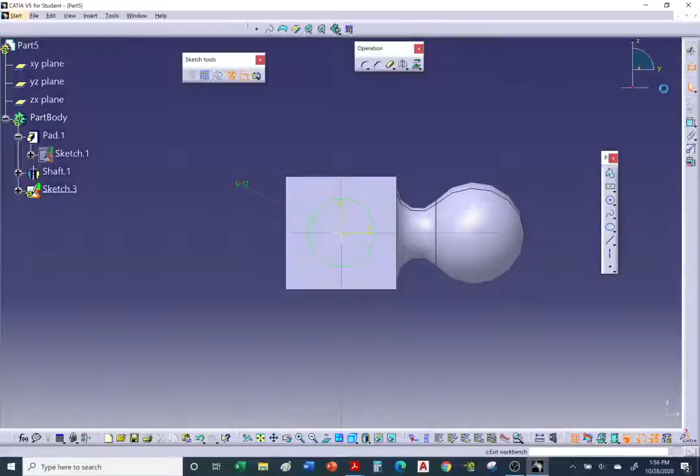Okay, so let's do a pocket, and we'll go up to last. And we're going to also have to go in the opposite direction, so we'll go to the second. So go to more, so we can also go up to last in the other direction. And okay, the hole goes all the way through.

Okay, so that's the knuckle. It's probably going to be the most difficult part. A lot of students get stuck on this one. That's why I wanted to model it, show you step by step how to do it. You can get lost trying to create the spherical part.

All right, so let's give it a name. Okay, so this is referred to as the knuckle because it looks like part of your knuckles, right? Looks like one of your knuckles, so.

Okay, and let's give it a color. So I right click on the part body. Let's make this a little brighter than the others, graphics tab. Don't make it too bright. More colors, okay, I'll pick a lighter color. Doesn't really matter.

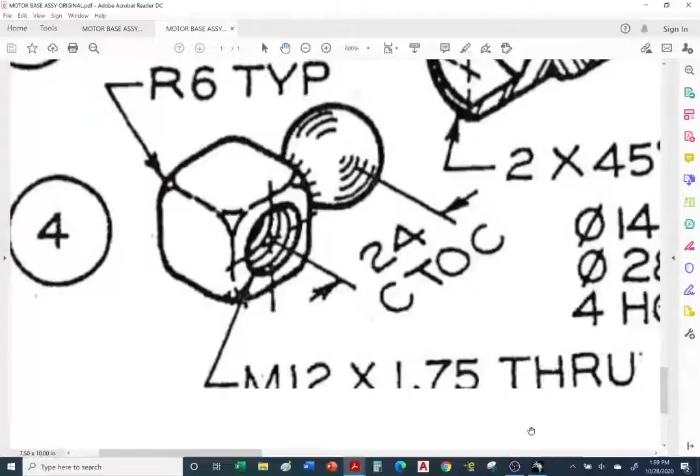All right, so I'm going to start by measuring diagonally across. I'm going to need that measurement. So diagonally, I'm going to go from this corner to this corner. That's about 34 and a half. I'm going to just round it downward to 34.

Okay, cancel. All right, so here's what I'm going to do. I'm going to do a sketch to round off this corner. There's a faster way of doing this if we were to use surfacing, the generative shape design workbench, but most of you have not taken that class, so I'm going to have to do it the long way.

I'm going to do a sketch on this vertical plane, the YZ plane, and draw a circle at 34 in diameter. Remember, the diagonal measurement was just over 34, so I'll round it down to 34.

All right, so again, we're trying to round off the corners. So what I'm going to do is rotate this sketch to remove the sharp corners. Let me go ahead and hit normal. So what I'm going to do is change this to a construction element.

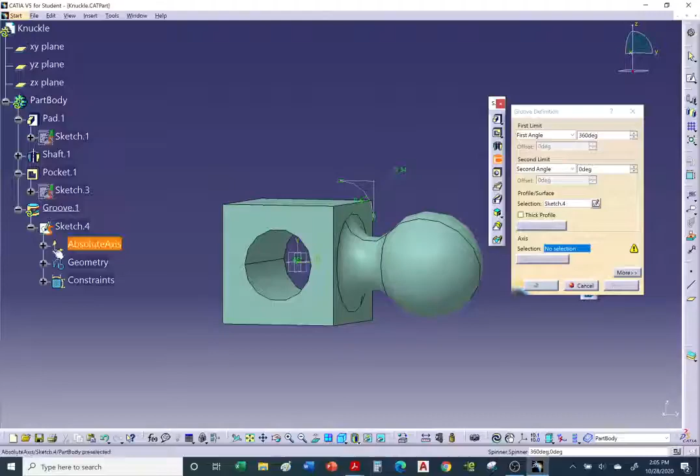Okay, exit the sketch, and then I'm going to revolve it using the groove command, about its H or the y-axis, or the horizontal axis. So let's pre-select the sketch, do a groove, and I'm going to select the horizontal axis of the sketch. As you can see, it's cutting through the corners.

Notice it only cut through a portion of it. Let's get the preview. So see, the sketch is cutting through, as you can see. So I need to take the sketch and just pull it outward a little bit so it eats up the other portion.

Okay, so let's adjust our sketch, stick it a little bit outward some more. Let's exit. And now you can see it's rounding off the corners.

All right, so what I'm going to do now is I'm going to mirror the other side. So go to sketch, and I'm going to mirror this selected, and we're going to mirror it about the vertical.

And if we want, we can put a dimension now on this line. There it is, it's green. Well, I'll make it 20, see if that works, 20. Now we can always come back and adjust it and exit.

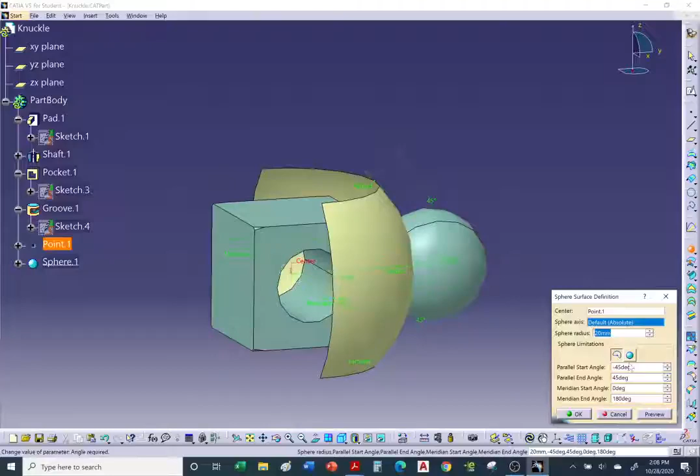And this is just surfaces about that point. Oh, it actually defaults to the origin, and pick the sphere option and reduce the size of that sphere. And then I would chop off those corners with the sphere. That's what I would do. Okay, so this would be the right way of doing it.

Okay, so let me undo a few times. This would be the correct way of doing it, but we don't cover surfacing in this class.

All right, so let's go back to our drawing. All right, so we have our knuckles now created. And finally, we have the hardware. So I will include in the email the hardware, the bolts, nuts.

You can model your own, or you can also download them from the catalog in CATIA. And I'll go over that in a few minutes. All right, so...

What? It's bothering me that this doesn't look right. Let me go back to our sketch. What I'm going to do is remove this radius. I'm going to give it a radius of 34... or actually 20.

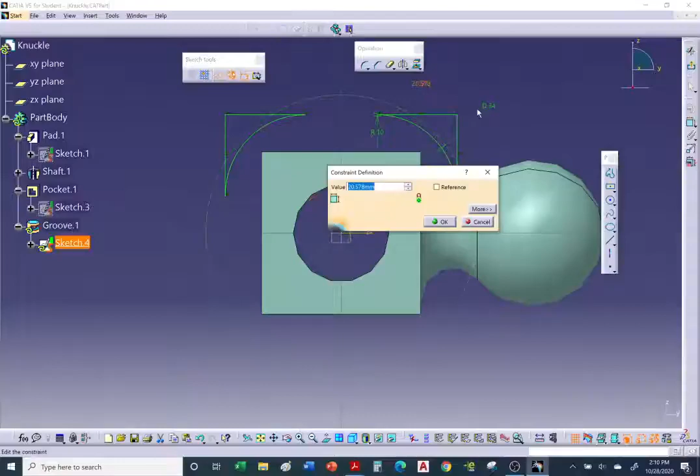Just didn't look right, so let's see if this looks better. Yep, so we rounded off the corners. All right, so...

Now let's go ahead and assemble this. Okay, so we're gonna go with start, and we're gonna create an assembly. Go to assembly design, it'll take you to an assembly window. Okay, now I'm gonna go window vertical.

We can see all our items. So once again, if you want to see all your items that you modeled, go to window vertical. It'll give you a window of each item that you modeled, including our new assembly window, which is still empty.

Okay, so I'm going to start by dropping the base plate. I'm going to drag and drop. So left mouse click, hold, and drag it and drop it into the product. That's one option. Okay, don't try and drag a large assembly into another assembly.

It'll eat up a lot of memory, and it may end up freezing up your computer. Okay, so I'm just going to drag and drop these items. Okay, so I'm going to go ahead and now drag in the support. Oh, I misclicked, try it again. Left mouse click, hold, drag and drop.

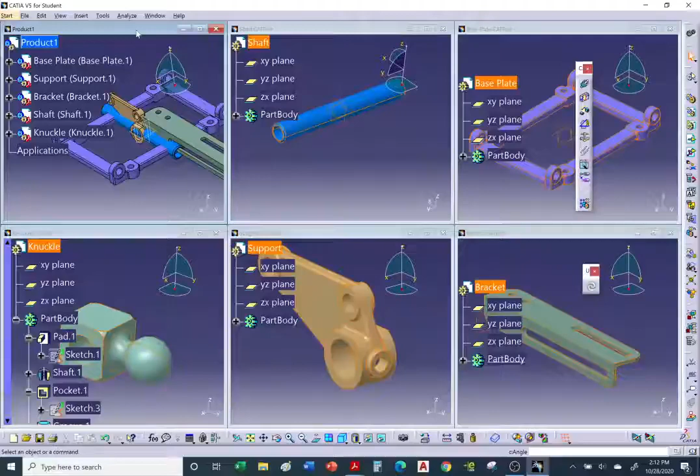All right, so let's maximize our assembly. Double click on the frame or hit the maximize button. There it is.

Okay, so we are going to make assemblies. If we go back to our handout, we're going to create sub-assemblies.

Notice the little red axes. I'm going to hit the branch here since it's already at max, to exit tree mode. You can always hit the little white axis at the bottom right corner to exit the tree.

These little red axes tell us that these are individual components, so we need to create sub-assemblies. If we go back to our drawing, let's go to the beginning. We have our top assembly, and we have these individual smaller sub-assemblies.

Let's create the shaft sub-assembly first. It's the shaft and two knuckles. So we're going to create the shaft assembly.

To add a new assembly inside, we're going to go to Product here, to create an assembly inside of this main assembly. Let's first give this main assembly a name, and let's call it the top motor base assembly.

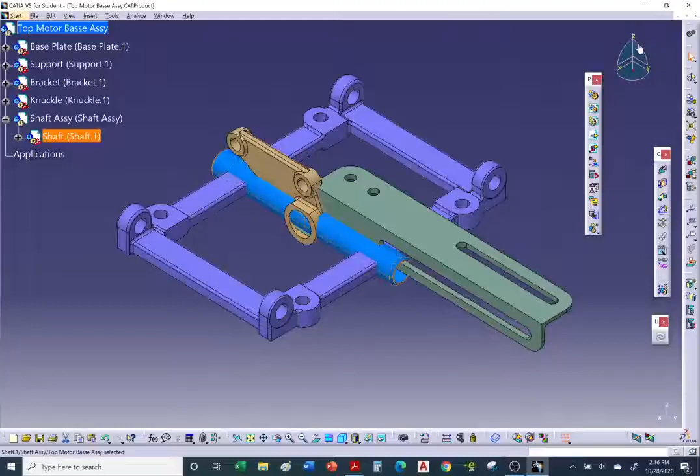Now the knuckle is buried in there somewhere, so let's use the compass, drop it on the parts. Notice how the top motor base assembly is active. Click on the items you want to move. Now we can see the knuckle.

Okay, reset the compass—View, reset compass. Now we're going to drag the knuckle into our binder. Here's the knuckle, you can right click, cut and paste, or just drag it. I'm going to take the knuckle, left mouse click, remove it from the backpack, and drag it into the binder. Notice the knuckle now is inside of our shaft assembly binder.

Now we need a copy. Notice we have one instance, and we need two knuckles. So I'm going to right click, copy, and paste it. Notice this is the first instance, so the new one will be the second instance. Right click, paste, and there it is—they're on top of each other. Okay, so we have two instances, two copies of the knuckle.

Let me drop the compass. So the mistake you're going to make is moving it over, dropping it on the knuckle, and then trying to move just the knuckle—wait a minute, why am I moving the entire binder? Because you need to first activate the binder. So let me reset compass and do it over again: double click on the binder, double click, click in space to deselect.

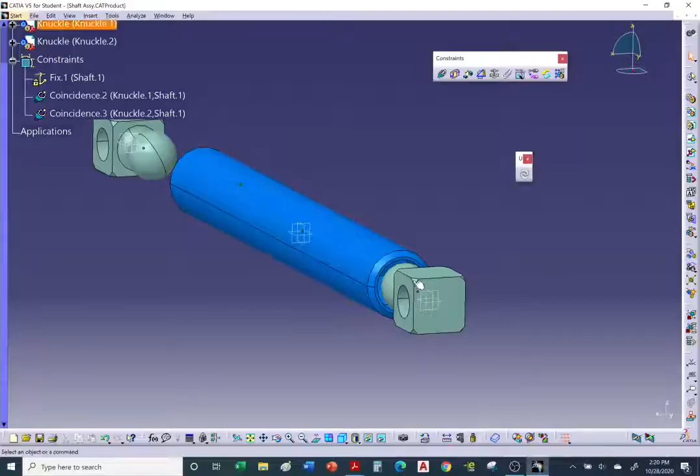Let's do the same thing with the other side. Put a coincidence between the knuckle and the shaft. There it is. Let's hit update to line them up. It happens that they are already in line, but let's see. Let's hit update anyway. 3, 2, 1, update. So this one rotated slightly, it was slightly off. That one's already in line.

Okay, so now we need a distance between the 2 knuckles. So what we need is to go to this one. There's going to be a bolt and a second bolt that goes through the holes here, and the knuckles are going to ride on that bolt, which is threaded.

So what we need is the distance from this hole to this one. It's 240. The holes of the knuckles are going to line up with these holes where the long bolts go through, and it's 240. Let's go back, and we're going to add a dimension from the axis of this hole to the axis of this one.

My mistake, we're going to do an offset constraint. Cancel, oh yeah, we were doing an offset. My mistake. Offset constraint, axis to axis. If you can't pick the axis, zoom in. Okay, and we're going to go with 240 millimeters. And update, 3, 2, 1, update.

Notice it did keep the 240, but now these are not centered correctly. So we need to take 240 and cut it in half to 120. We're going to go from the center vertical plane to the axis, 120, which is half of 240.

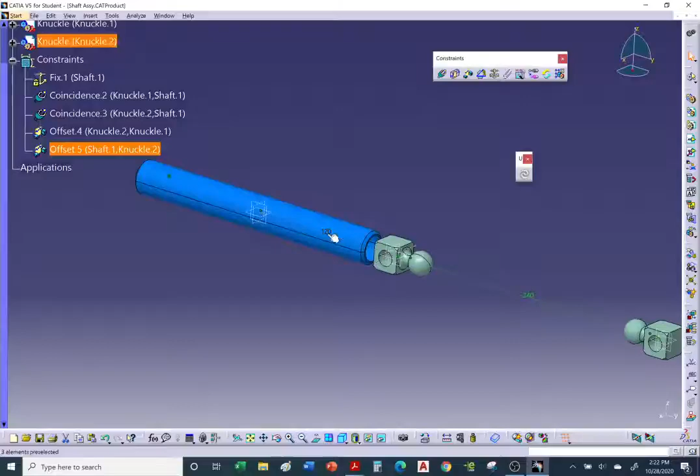So let's do another offset from this vertical to the axis or the plane, either one will work, and let's make it 120, half of 240. Update, 3, 2, 1, update. And whoa, it went in the wrong direction. So there's the 120, you can see we need to put a minus to go in the opposite direction. Let's double click on the 120 and just put the minus in front to change the direction. Enter and update.

And there it is, so there we have it. Okay, so we're done with the shaft assembly.

Let's go back to the motor base assembly. Top motor base assembly. I misspelled base, let me right click properties and change the name, put one too many S's. Okay, so there's our assembly.

Once again, we need to line it up with the holes on the base plate. I'm going to do a coincidence between the hole of the knuckle and the hole of the base plate. Notice how it doesn't let me pick it?

The reason is because the binder is active. You can only add constraints to things inside the binder. So we need to hit escape and exit the command. We need to move things within the binder, so we're going to attach the binder to the base plate inside the backpack.

Let's double click in the back on the backpack or the top motor base assembly, click in space. So you can see it's blue, it's active. Now we should be able to go coincidence from this hole to this hole and hit update.

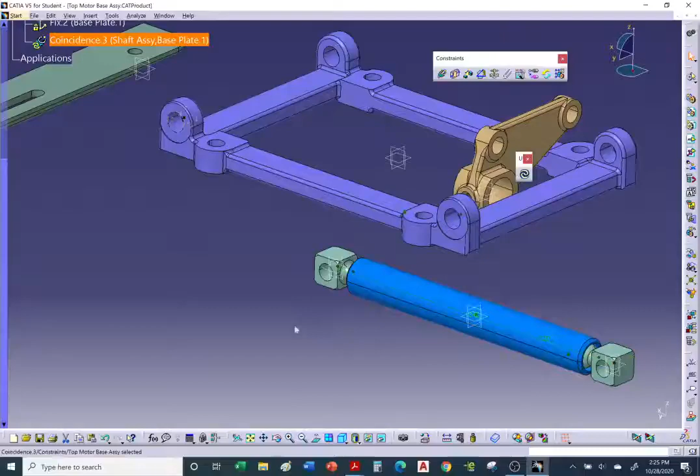So let's add a coincidence between this hole and this one, and let's hit update, see if it accepts it. And it did accept it. And once again, if the holes were not perfectly the same exact distance, you would get an error message, even if it's off by 0.0001 millimeter.

All right, so now let's add a distance between this face and the face on this side. So I'm going to add a distance from this face to this face. Now I want it to go in the opposite direction, so I'm going to make it a positive instead of the default, which is negative. Let me type in 50. And OK, and update, and there it is.

I'm going to reduce it to 25. 50 seems to be too much. 25. OK. And update.

All right, so now let's move to the next assembly. Next assembly is the support and the bracket. Okay, so we're going to add a new binder to the backpack, a binder made up of the bracket and the support.

Okay, go back to the drawing. So we're going to call it the support assembly or subassembly. So we're going to put these together. Support subassembly or assembly. Okay, so let's add a new

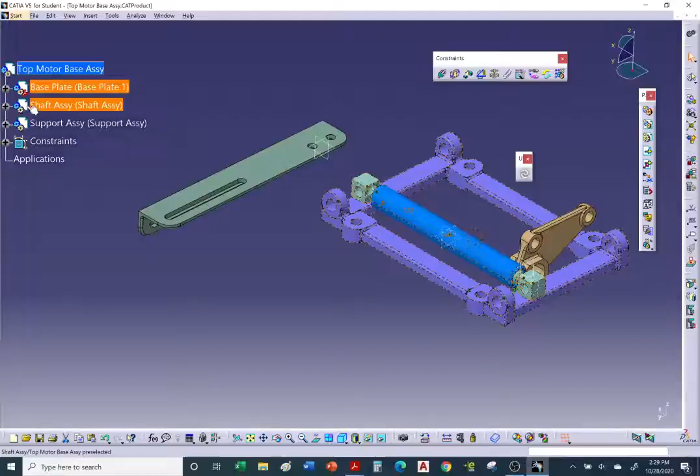Okay, and that's the reason it has that little red axis, because it's just an individual component. And these are assemblies, notice they don't have the red axis. Okay, so now let's go ahead and open up the support assembly in its own window. Right click and look for window, open a new window.

Okay, let's start by anchoring one of the pieces. I'll anchor the support, even though the bracket is longer, because the support supports the bracket. So I'm going to anchor the support, and now attach the bracket to it.

What I'm going to do is put a coincidence between this hole and that hole—between the hole of the bracket and this semi-cylindrical shape. So I can grab the axis of this semi-cylindrical shape, click, and update, and it'll line it up as you can see. It lined up the hole with the slot, or at least the right axis of the slot, not the left one.

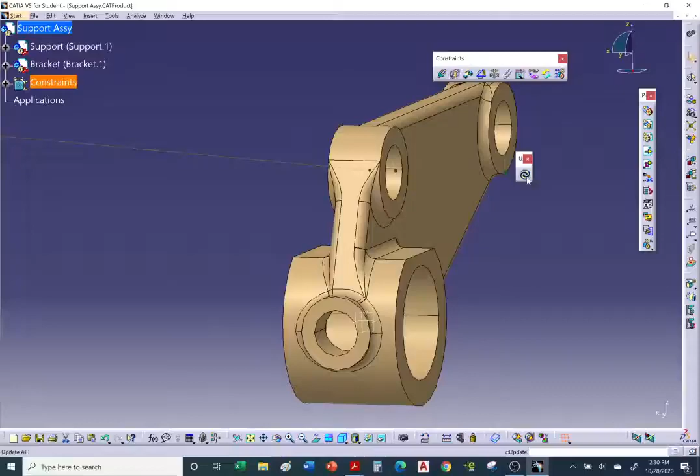Now we're going to do a face-to-face. I don't remember if the face goes to this surface or the other one—let's go back to the drawing. Okay, this surface of the bracket touches the opposite surface of the support. So let's go back and put a face-to-face contact between this outside surface and this surface. Update, 3, 2, 1, update—there it is.

Now what happens if I rotate this bracket? Let me reset my compass. So let's say you wanted to line up this bracket with the support and you didn't know what to do.

You can add an angle constraint. So I'm going to put an angle constraint between the top of the support, this flat surface, and this surface. Or you can pick the edge—either one will work. I'll pick this surface. Right now the angle is at 20, I want to change it to 0 degrees. OK, 0 degrees and update, and it'll straighten it out.

So it lines up, so that the slot also lines up with this hole, and this bracket can slide back and forth along these two holes. We're missing the hardware—we'll come back and fix that.

All right, let's go back to our top motor base assembly. And there it is.

Okay, so the next thing is to line up this hole with the shaft. Make sure you have the binder, the backpack, the top motor assembly activated. Double click—it's already blue, it's already active. So now we can move the binders inside the backpack and line up this hole with this shaft.

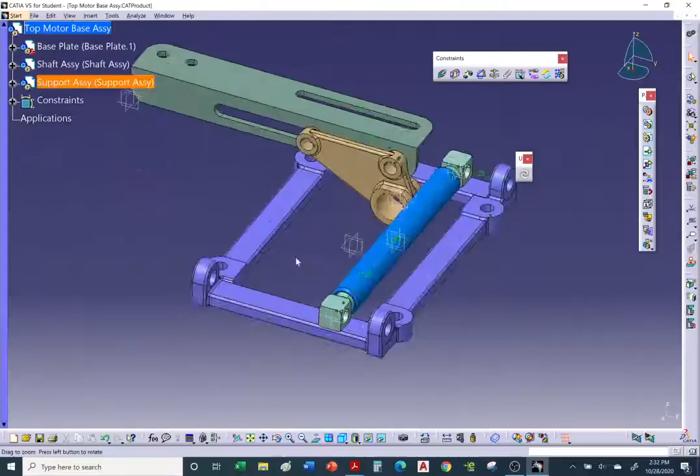So we're going to line up this binder with this binder. Let's take the coincidence constraint and put a coincidence between this hole and the shaft—just pick on the cylindrical surface and update. There it is. Now let's move it over to the left.

So this is actually the left support assembly. Let me fix the name—right click, properties, support assembly. I'm going to go LH, that stands for left hand support. So I'll call it the LH, left-handed support assembly, because there's also going to be a right-handed one. Okay, let's move it over.

All right, so let's put a distance between the knuckle and this face—a distance between this surface and this surface. You can also pick a point, by the way; you can put a distance between a surface and a point, or an edge, or a line. I'm going to go with 25, see how that looks. 25, offset, okay, and update in 3, 2, 1, update—there it is, that looks good.

All right, so we're still missing the right-hand side, and I'll save that for last. Let's start adding some hardware, the bolts and nuts, and then we'll do the right-handed side, the support assembly RH, right-handed. We'll do that at the end.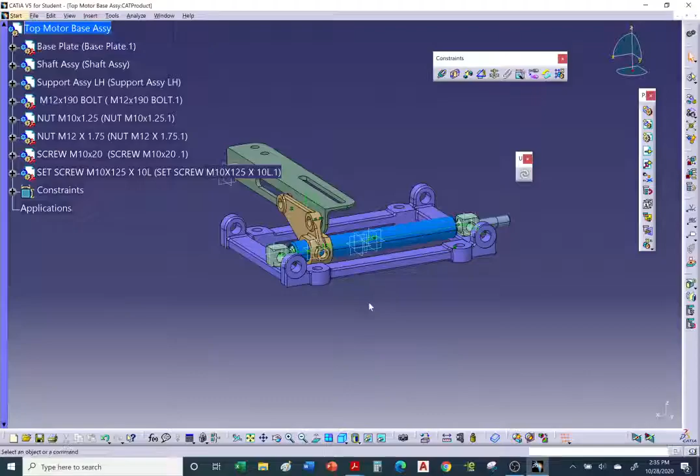Now where are they? They're right here in the middle, all on top of each other. So they land at coordinate 0, 0, 0.

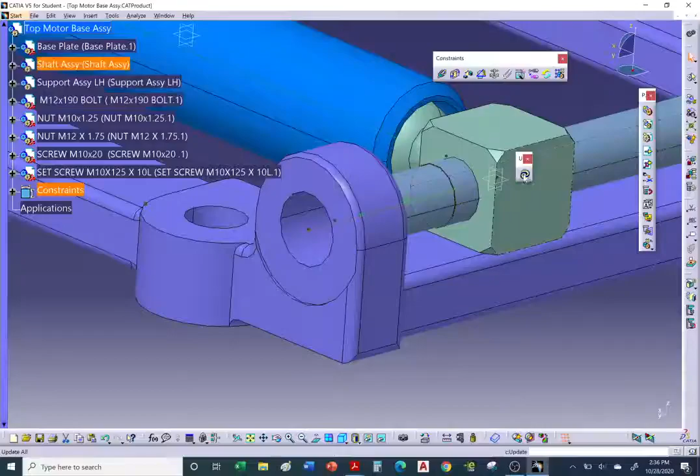Okay, so let's take this bolt, put a coincidence between the bolt and the hole, and update. There it is. Okay, so now we're going to put a, by the way, it doesn't matter if we insert the bolt through this side or this side. I'm going to rotate it so this surface matches up this surface, so I'm going to put a contact constraint between the bottom of the head of the bolt and this spot face. Click and update, 3, 2, 1, update. And there it is. There's the bolt.

Now you can either use... no, it looks like I clicked the wrong surface. That looks like it's right.

Okay, so to bring in the catalog, let's see if I can find it. It looks like a book. Actually, there it is, having trouble finding it. Okay, so there's a catalog of hardware. You can go to this catalog, click it, and it'll take you to a library of bolts and nuts. You can click in here in space and zoom in. So if you want a bolt, just click on the bolt, it gives you a preview.

You can follow an ISO standard if you like, the international standards, or you can use the US catalog, American standards. I'm going to stay with ISO standards, the international standards, since they mostly use millimeters and not inches. You can double click on bolts.

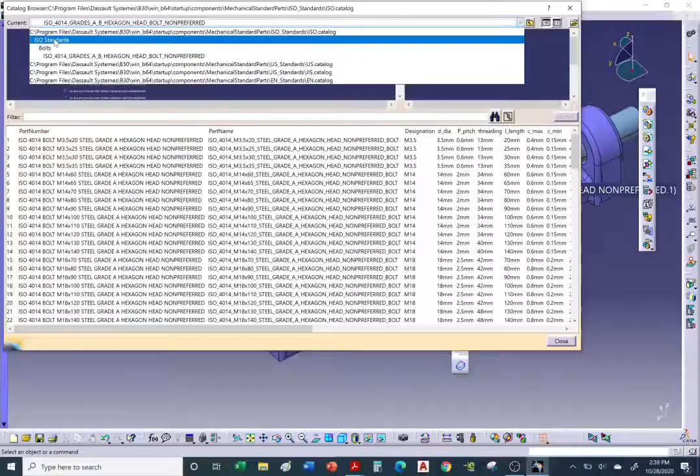Go back to ISO standards. So I went back to ISO standards, and if I want to bring in a hex nut, there it is, the folder of hex nuts. Double click. Okay, so what style do you want - a hex nut with the washer or just a plain hex nut? I'll just randomly pick one. Double click, let me double click again. There it is, it loads it. So I was looking for an M12 or M14.

Let me just randomly pick one. I'll use an M12, I don't see an M14. Double click and it'll load it. And there it is, it brings in an ISO standard nut. Let me go ahead and close my catalog.

You need to do this inside of an assembly or it will not load it. If you're in part design, it will not load it. You have to be in an assembly to load hardware from the catalog. If it's not the right length bolt you're looking for, just alter the bolt, make it longer, and save it with the new name.

I'm just going to go ahead and delete these, I just wanted to show you how to bring them in. So I'm deleting it, and it creates a window. When you delete an item that has not been saved, it'll take you to its own window.

We go back to the motor base assembly. Let's delete this ISO hex nut, I'm going to delete it. Do you want to open it in its own window because you haven't saved it? Nope, it's okay, I don't want to deal with that. Okay, so here we go.

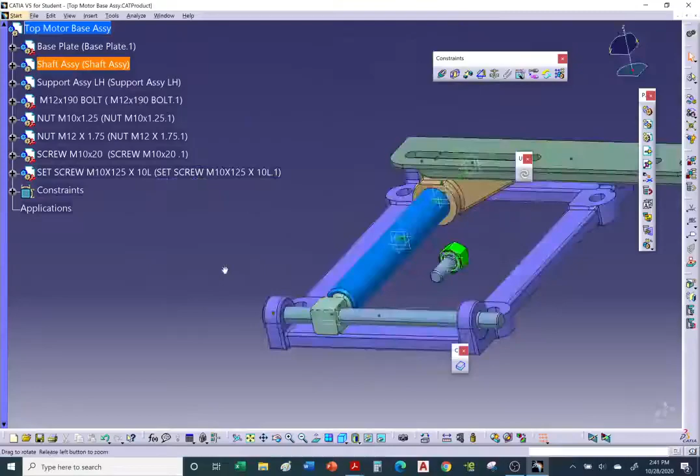Or once again, you can just use the one that I emailed you. Now let's line up the hex nut with this bolt. Let me use the compass to spread things out a little bit, and just drop it on there. Let me pick this first, this smaller screw.

Just move it out of the way. Grab this hex nut, I'll pull it upward. Here's a smaller hex nut. Notice how I saved the bright colors for the smaller items. And we have the set screw.

Let me reset compass, view, reset compass. Let's go ahead and add this large hex nut to the screw. So let's use coincidence and zoom in far enough so you can grab the axis. There it is, and the axis of the bolt. Let's go contact face to face from this surface to this one.

Ooh, maybe I need a washer for this so it doesn't damage the surface. I'll leave out the washer and let's hit update. And there it is.

I'm going to make a copy and place them on the other side. I'm going to use this long bolt and this hex nut. These are M12s, so those are diameter 12 holes and shaft. And copy.

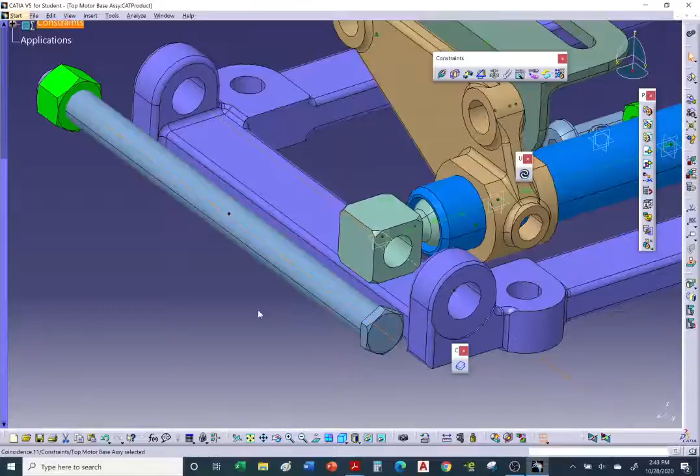Now let's add some coincidence between the bolt and the hole, and face contact between the spot face and the bolt. Let's go ahead and hit update. Now let's do the nut.

Coincidence between the hole and the bolt. I'm going to speed it up a little bit. Contact face between the tab and the hex nut, and update. All right, so we took care of that.

Now we need a set screw. This is a smooth shaft, and as you can see, the support slides along the shaft, but it'll rotate, and since it's a nice inline fit, it's still loose. We need to screw it down or lock it down with a set screw. So here we have a set screw.

We're going to put a coincidence between the set screw. As long as you pick a cylindrical or conic shape, it'll pick the axis, and let's pick the axis of this hole, this tapped hole. And now we're going to do an offset.

Offset between this surface and this surface, and I'll leave it at 0 and adjust if needed. Hit OK, and we're going to update. And there it is.

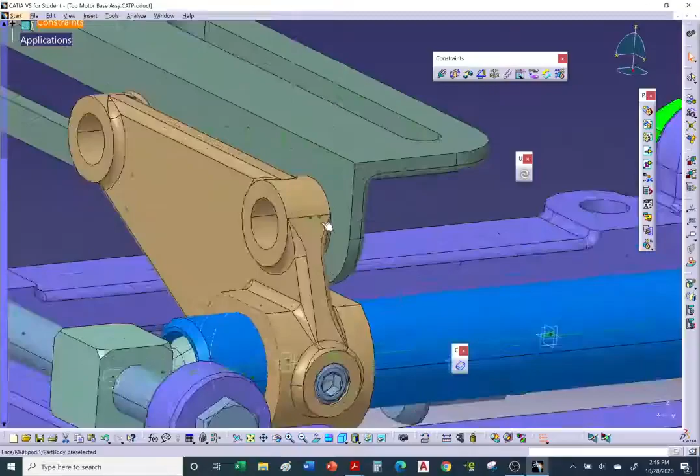Let's go ahead and add the screws into the support and the bracket. This bolt and this screw go with the bracket and the support, so we're going to have to drag them into the support assembly binder. This is the binder, we want to drag this small bolt and nut. I'll just drag it and watch how it populates the binder.

Here's the bolt, we're going to drag it into this binder. There it is.

And now we're going to take the hex nut and drag it into this binder. There it is. So the binder - you can see anything in orange is part of this binder.

Just to verify, notice how we have the bolt and nut part of this left-hand support assembly. We can add the constraints here between this bolt and nut onto the support, but we need to double click on our binder here, our support assembly left-hand side. We need to double click to add constraints between these items. Okay, let's go ahead and do that.

So let's add a coincidence between this bolt and this hole. And let's do a contact between this face and this face. And let's hit update, 3, 2, 1, update, and there it is, there's the bolt.

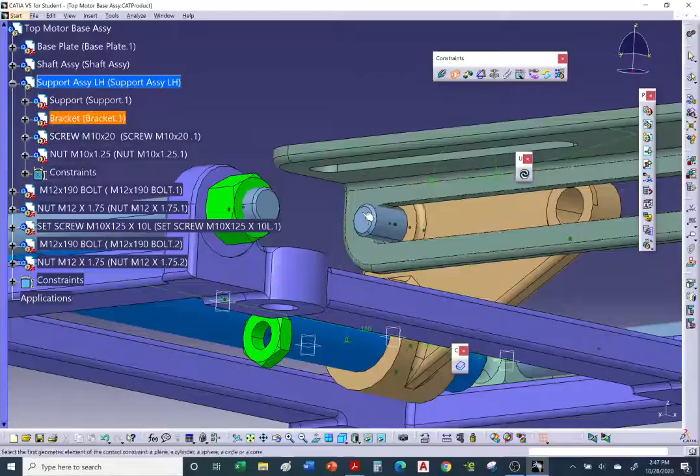I left out the washers by mistake. We'll just leave them out just for time. Surface and surface of the nut. Okay, and hit update. And 3, 2, 1, update. Yeah, so we should have added a washer. I'll just leave it out just because of time.

All right, so now we need a second set of screw and nut. So I'm going to make copies of the screw and nut. Hold on to the control key, select them, copy, and paste it back into the binder.

Okay, so I'm going to use the compass. I'm going to drop it on this surface. Then I'm going to pick the nut, the second nut, not the first one, and I'm going to just slide it along this surface, pick the inside surface here. There it is. And I'll pick the second screw, not the first one - the first one's already constrained. And slide it over or upward.

Okay, let's reset the compass. Again, note that this binder is active. It's blue because we're moving items inside of this binder or constraining inside this binder. Okay, so let's go ahead and add some constraints.

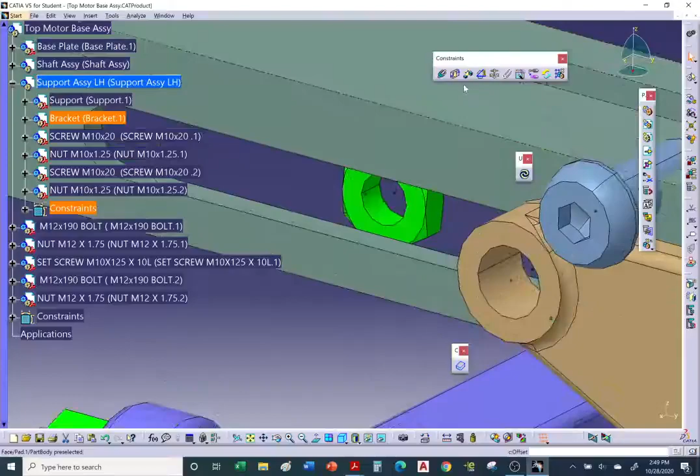So we're going to put a coincidence between the bolt and the hole. And a constraint between the nut and the bolt. And let's add contact constraint, contact between this surface and this surface. And let's put a contact constraint between this surface and this surface. Okay, and we're going to update in 3, 2, 1, update. And there it is, everything looks good.

All right, so looks like we're almost there. Let's go ahead and close this binder. Okay, so let's go back to our main assembly. So all we're missing is the right-handed support sub-assembly. Okay, so we have everything. The only thing missing is this right-hand support assembly or sub-assembly. Okay, so here's what we're going to do.

Let's go back. Instead of having to model these, what we can do is we can do a mirror at the assembly level. So we're going to do a mirror at the assembly level. So let's go to the top assembly, double click on the binder, and we're going to do a mirror.

Let's see if we have it in here, the mirror command. If not, I can always go to the drop down menu, looking for mirror, and I don't see it. Okay, let me go to the drop down. Okay, here it is. I don't see mirror. Oh, but I see symmetry.

That'll work. So we're going to do a symmetry of the left hand. Okay, so go to the drop down insert. We're going to do a symmetry. Click on symmetry.

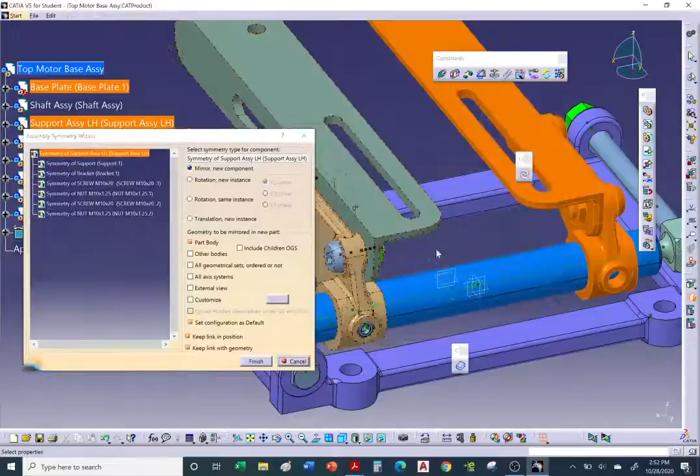Okay, now it's telling me what do you want to mirror? Okay, so we're going to mirror this entire binder here, the support, the left hand support assembly. Click. Notice it's giving us a preview. So there it is. It's mirroring everything over in that assembly.

You can mirror everything - the geometric sets, the sketches, the pads, the pocket command. You don't need to mirror everything, but you have the options to mirror multiple items inside of each individual part. We don't need to do that, so we're just going to keep it at default.

Once we do finish, it'll generate and create new files for the right hand side. Notice this is the name it's given them. Now, one thing we do want to keep is a link between the positions, so it's always mirrored about the position of this one. And we do want to keep a link between the two, so if one changes, the other one will also change.

You also have the option to rotate or translate. We're going to mirror it, leave this alone, just mirror. So you do have a bunch of options here that you can pick from. I'm going to leave it with the default settings and hit finish. Give it a few seconds and there it is - it generates new files.

Now the right way of doing this is to rename all of these - remove the symmetry and put RH. So this would be the support assembly RH, and we can call this support RH for right hand, bracket RH. The screws and nuts we can leave alone. Typically, out in the real world, you don't want to use the name symmetry, but I'll just leave it for time - I don't want to go in and change everything.

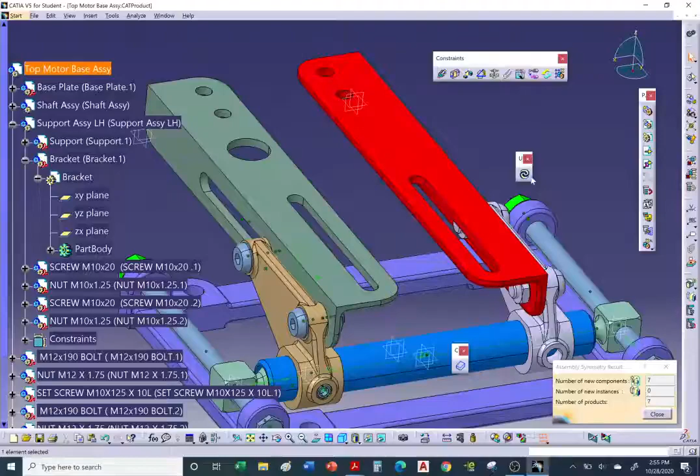Okay, so now let's go back to the top assembly - double click at the top assembly so it'll be able to update. Here's the update command, and in 3, 2, 1, update. Watch what happens - it updates. That's the cool thing about the symmetry command: these two are linked because we chose to keep the link between the two.

Let me go back, go back to the bracket, the left-hand bracket - it takes me back to part design workbench. And I'm going to remove that hole, delete it, and it turns red. The right hand turns red, knowing there's been a change to its twin, or its opposite - its evil twin. Let's go back to top assembly so we can do an update. Notice it's blue now, and update.

Okay, and the only thing missing is we need a set screw here, so I need another set screw. I'm going to make a copy of the set screw - copy, paste it into the top assembly. Notice it's instance number 2. So I'm going to use the compass to drag it over.

Reset the compass - view, reset compass. And let's put a constraint of coincidence between the hole and the set screw. Let's use an offset between the face of the set screw and the surface, and keep it at 0. Update, and there it is. So let me redock these toolbars.

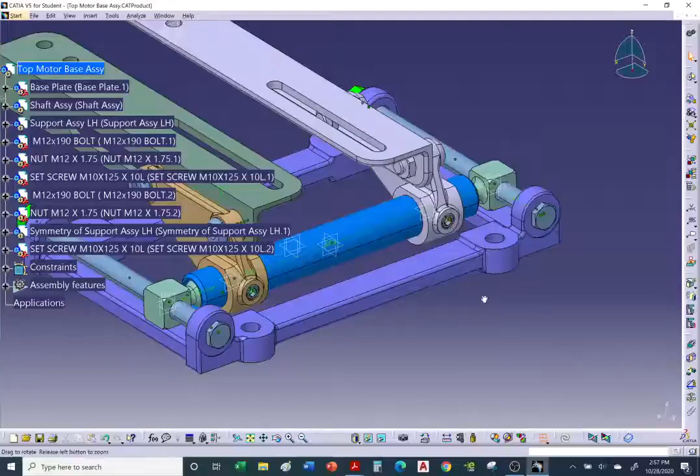Now we're ready to save. If you have not saved this - but one thing I wanted to mention is when I check your work, I'm going to do an exploded view. But before I do that, let me go ahead and save this. So I'm going to go to File, Save Management. These are all new items except for the hardware. The ones that show open, those are the hardware that I emailed you. The ones that are new - these are new files that we created: the support, the brackets, the knuckles, the shaft, and the base plate. Okay, so let's go to the top assembly.

Okay, so go to the top motor assembly. There it is, it gives you a preview. So, top motor base assembly. Once you save the top assembly, it'll auto save everything else.

Okay, I'm going to go save as. If you want to save it on your flash drive, I'll go ahead and save it on my flash drive.

I'm going to create a new folder, and I'll call it a motor base assembly. Click away to create that folder, double click to open it, and you're going to save your top motor base assembly in this new folder. And save.

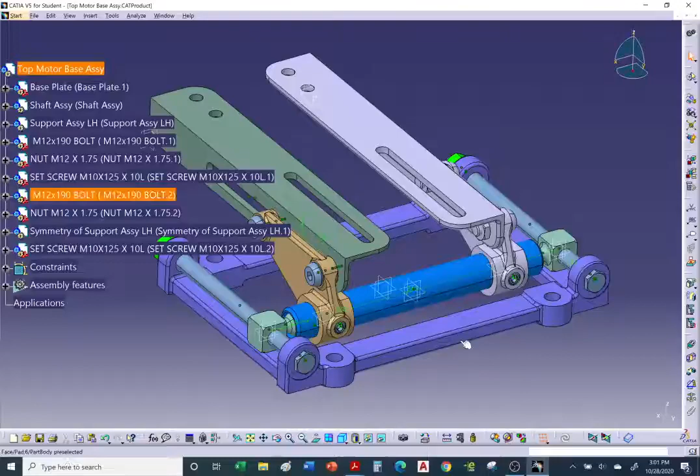Okay, so let's say I open your file - you emailed it to me, the zip folder with all your files that make up this assembly. What I'm going to do is use the explode command to check if everything's constrained. So I'm going to use explode, and hit explode.

It's giving me a warning when I hit OK - are you sure you want to explode? So you can see everything is being exploded all over the place, and yes, things go flying everywhere. Now I'm going to hit update.

So if I constrained this correctly, it should all go back to its constrained position. 3, 2, 1, update - and it all goes back, oh, except the set screw.

So this set screw, I missed it - somehow I missed constraints on this set screw. Update... oh, there it is. I hit update again, somehow it missed it, but after hitting update again it recognized the constraints and placed it back.

I think it's because the symmetry parts were not constrained - they're constrained with respect to the left-hand side. So I think it first had to constrain the right-hand side before the set screw could recognize its constraints to these symmetried parts. All right, so end of motor base assembly.